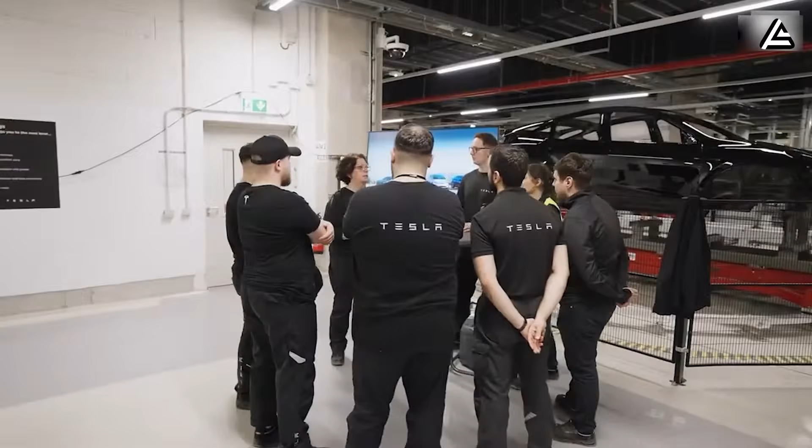How is Elon Musk using aluminum to declare war on China's battery monopoly?

There's one truth the mainstream media rarely dares to say out loud. China controls over 75% of global lithium-ion battery manufacturing and owns majority stakes in cobalt and graphite refinement. China also controls over 50% of cobalt refining capacity used in high-performance cathodes, over 80% of natural graphite anode processing, and almost all low-cost lithium hydroxide conversion plants used for EV batteries.

In 2024 alone, Tesla had to reroute over $3.8 billion worth of battery materials due to export restrictions from Beijing. The geopolitical implications run deeper than most realize.

China's dominance isn't accidental. It's the result of decades of strategic investments in mining infrastructure, refining capabilities, and manufacturing scale. By controlling the upstream supply chain, China effectively controls the pace and pricing of global EV adoption. This creates a strategic vulnerability for Western automakers, who find themselves dependent on a single nation for their most critical component.

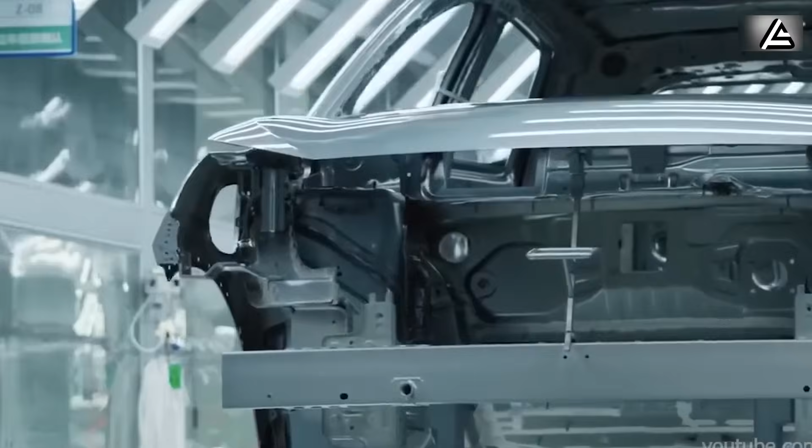Consider the recent escalation. In 2024, China implemented new export controls on graphite, a critical anode material. This single policy decision sent shockwaves through the global EV industry, forcing companies like Tesla to scramble for alternative suppliers and accept higher costs. The message was clear.

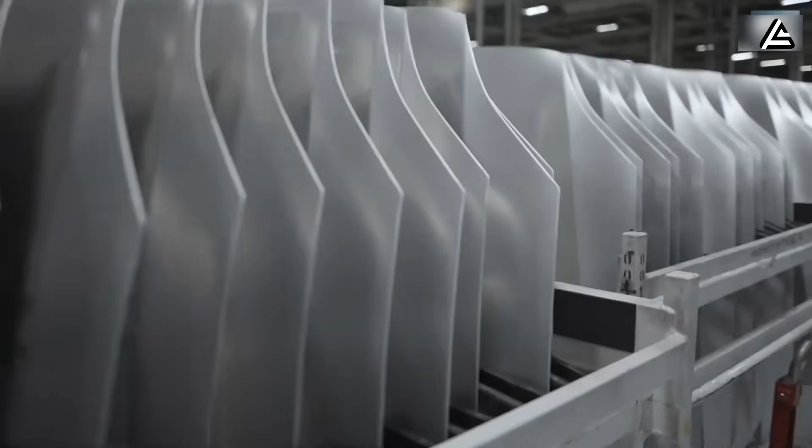China's battery material dominance gives it significant leverage over the global transition to electric transportation. That means if you're building an EV even in America or Europe, your battery is still built in China by Chinese-controlled supply chains. And that includes Tesla, until now.

But aluminum changes everything. Aluminum is refined locally in the United States, Canada, and Australia with zero geopolitical friction. It's already part of Tesla's internal supply chain via Giga Texas smelting units, newly expanded in Q3 2025. Unlike lithium or cobalt, there's no child labor, no rare earth blackmail. Tesla has been preparing for this moment longer than anyone realizes.

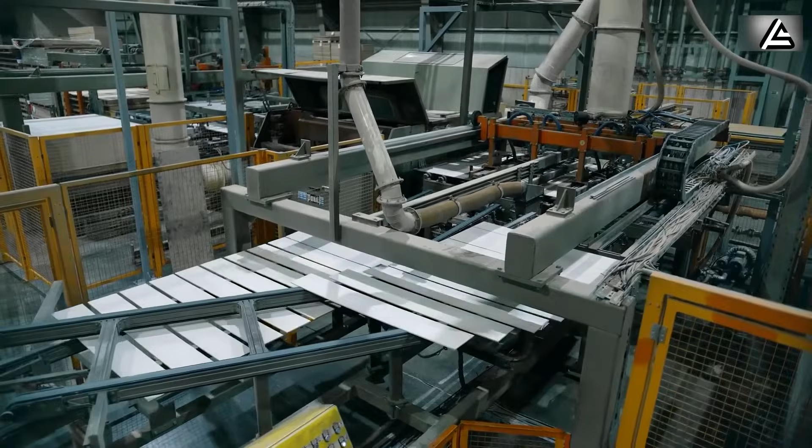The aluminum advantage extends beyond just supply security. Aluminum is the most abundant metal in Earth's crust, making up about 8% of all rock and soil. Compare this to lithium, which represents just 0.002% of the Earth's crust and is concentrated in a handful of geographic locations.

This abundance means price stability. Aluminum prices have remained relatively stable over decades, while lithium prices have experienced extreme volatility, sometimes increasing by 500% in a single year. In fact, Tesla and Alcoa Rio Tinto are collaborating to develop a carbon-neutral ELYSIS aluminum smelter, with industrial trials starting in 2024.

An aluminum smelter was delivered to Giga Texas in February 2021, demonstrating Tesla's expanding in-situ aluminum casting capabilities. They've expanded in-house smelting capacity at Giga Texas to support structural aluminum casting and patented new battery-grade aluminum oxide treatments in late 2024, now embedded in the aluminum-ion cell architecture.

This isn't a coincidence. This is war preparation. Tesla's vertical integration strategy with aluminum represents a masterclass in industrial planning. By bringing aluminum smelting in-house, Tesla gains control over not just the raw material supply, but also the quality and specifications of the aluminum used in their batteries.

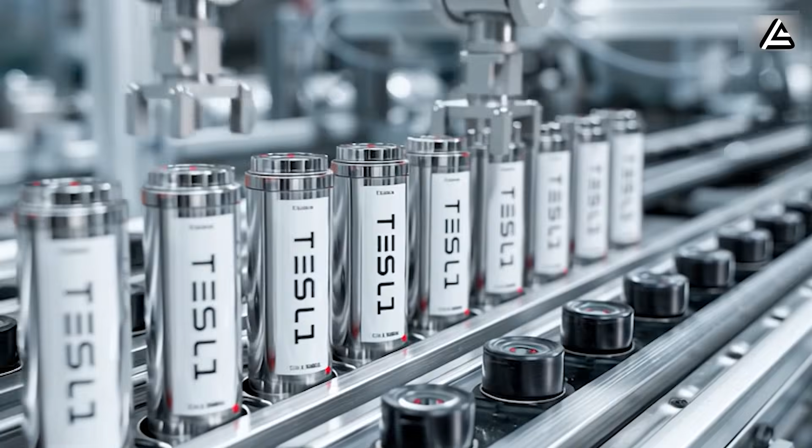Elon Musk's aluminum-ion battery is not just chemistry, it's a geopolitical missile. It's how Tesla breaks free from China and takes 100% control of its EV production chain.

By going aluminum-ion, Tesla doesn't just save on cost or weight. They gain something much more powerful: sovereignty, no delays from foreign ports, no risk of sanctions, export bans, or price extortion, and total vertical integration, from raw metal to battery to vehicle, entirely on United States soil.

This is why Tesla isn't loudly marketing the aluminum-ion battery yet. Because it's not just a product launch. It's a strategic decoupling from the most powerful manufacturing monopoly in the EV world.

And Elon Musk knows: whoever controls the battery supply controls the future of transportation. If Tesla really manages to control the entire EV supply chain on American soil, from the raw metal to the motor, is that an industry shocker?

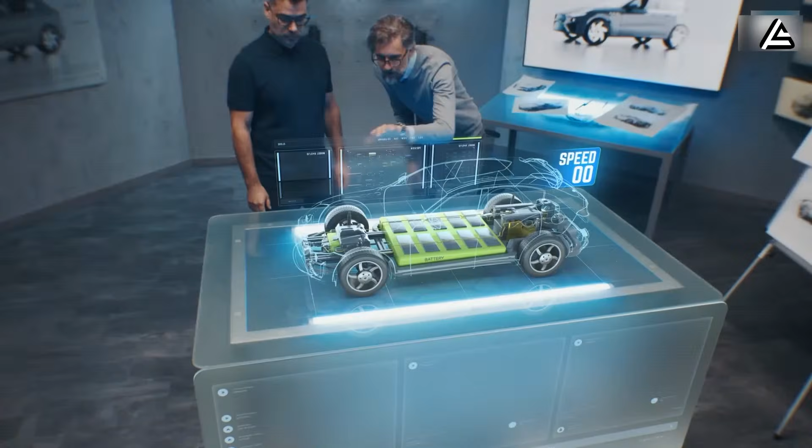Why is this battery the first to finally fix EV's hidden weakness: slow power delivery? Let's face the truth that nobody in the EV industry wants to say out loud. Charging fast doesn't mean your car drives strong.

Sure, it sounds great to say your EV can go from 0 to 100% in 20 minutes. But then why does your car still hesitate when merging onto the highway? Why does acceleration flatten out when you're carrying 5 passengers uphill? Because the real limitation is not the recharge rate, it's discharge performance.

Lithium-ion batteries have been failing us quietly for years. The physics behind this limitation are more complex than most realize. Traditional lithium-ion cells face a fundamental trade-off between energy density and power density. You can optimize for one, but not both simultaneously.

This occurs because lithium ions move relatively slowly through the electrolyte, creating bottlenecks during high-demand situations. When you floor an EV, the battery management system actually limits power output to prevent overheating and voltage sag, which is why even high-performance EVs can feel sluggish compared to their theoretical capabilities.

Consider the real-world implications. A Tesla Model S Plaid can theoretically produce over 1,000 horsepower, but only for brief bursts before thermal and voltage limitations kick in. During sustained acceleration, like highway merging with a full load, the actual power delivery drops significantly.

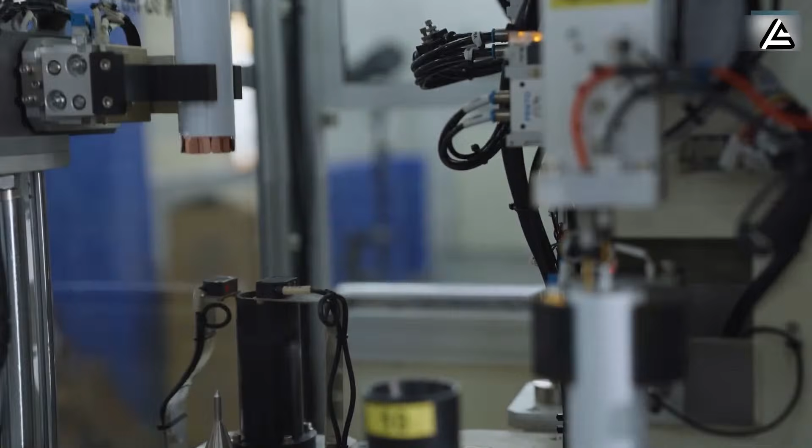Tesla's aluminum-ion shock changes everything. The 2026 Tesla aluminum-ion cell isn't just about being lighter or cheaper. It's built to deliver raw, sustained power without hesitation. While every other manufacturer focuses on cramming more energy into their cells, Tesla engineered theirs to unleash that energy like a controlled explosion. Now imagine what happens when Tesla flips that equation.

The 2026 aluminum-ion battery uses a tri-channel aluminum flow matrix for uniform current extraction, carbon-integrated anode mesh designed for up to 1,000 amperes of instantaneous discharge, and Tesla's new firmware-controlled power surge modulation, which delivers adaptive burst output when the driver demands full power. These are the actual engineering breakthroughs that make this battery a discharge monster.

The tri-channel aluminum flow matrix deserves special attention because it represents a completely different approach to ion transport. Unlike lithium-ion cells, where ions move through a single electrolyte medium, Tesla's design creates multiple parallel pathways for aluminum ions to move simultaneously. This is similar to how multi-lane highways handle traffic more efficiently than single-lane roads. The result is dramatically reduced internal resistance and the ability to maintain high current flow without the voltage drops that plague lithium-ion systems.

The numbers are absolutely devastating. 15C continuous discharge rating, that's up to 375 watts per cell, 13 times higher than some lithium cells in compact EVs. Peak pulse discharge of 60C, or 1,500 amperes per hour at the pack level for 5 seconds without degradation. Less than 4% voltage sag at 90% load. It maintains greater than 94% power delivery after 10 consecutive acceleration cycles at 70 miles per hour.

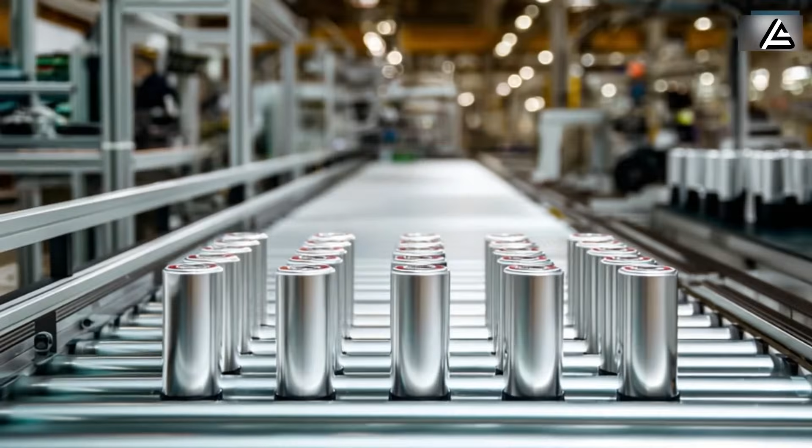Here's the shocking tested data that proves this isn't hype. In Tesla's internal testing, a Model 2 prototype equipped with this battery reached 0 to 60 miles per hour in 3.8 seconds, with only a single rear motor. It maintained 98% torque output during a 12-minute uphill climb with full passenger and cargo load.

And for towing, peak discharge remained stable at 1,200 amperes when pulling a 2,000-pound trailer at 65 miles per hour on a 5% incline. Battery temperature increased by only 11.2 degrees Celsius during the entire climb. Let that sink in. Full throttle, full load, full heat, and it just keeps going.

So if you've ever floored your EV and thought, why does this still feel slower than a gas truck? Elon Musk just built your answer, and it's firing back at every weak battery ever made.

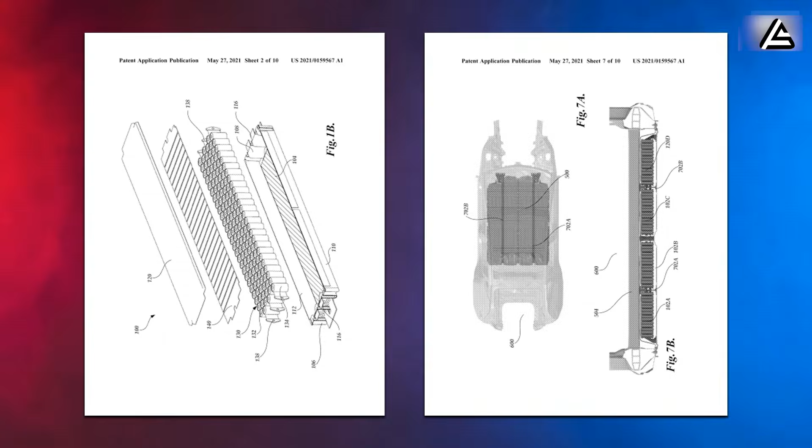How is Tesla turning its gigapress into a giga battery plant? This is where things get wild. In 2021, Tesla quietly filed a patent titled Integrated Energy Storage System, and most people missed what it truly meant. On the surface, it described a battery pack with a honeycomb-structured bottom and a built-in heat dissipation system. But what it really outlined was something far more radical: a battery that isn't installed into the car, because it is the car.

The patent details reveal Tesla's vision for what they call structural battery integration. But this goes far beyond current structural battery packs. Traditional structural batteries still maintain a distinct separation between the battery cells and the vehicle structure. Tesla's approach fundamentally merges these systems at the molecular level. The aluminum used in the battery chemistry is the same aluminum used in the structural components, creating a unified system where the distinction between battery and chassis becomes meaningless.

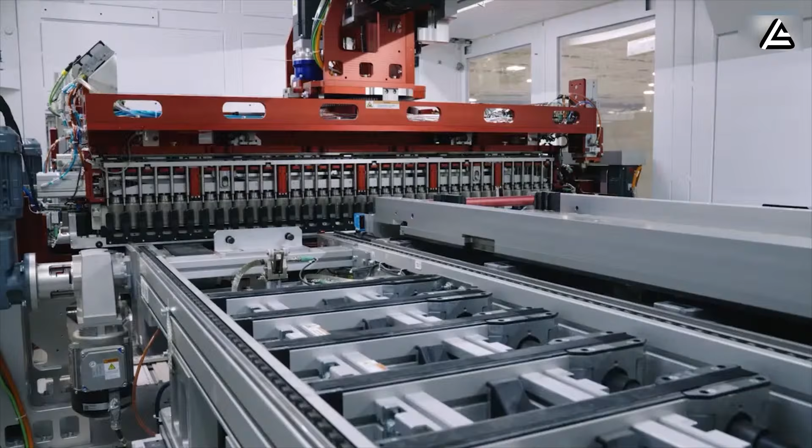Here's how Elon Musk is pulling it off. Instead of building a battery as a separate unit and bolting it to the chassis, Tesla is now using high-pressure aluminum casting, the same massive gigapress tech used to mold the rear frame of the Model Y, to cast the battery structure directly into the car's body. We're talking about structural battery enclosures, thermal channels, even electrical conduits, all molded into one unified piece of the frame. No more battery modules, no more miles of wires, no bolts, no brackets, no glue. Just molten aluminum forming a vehicle that is both a machine and an energy source.

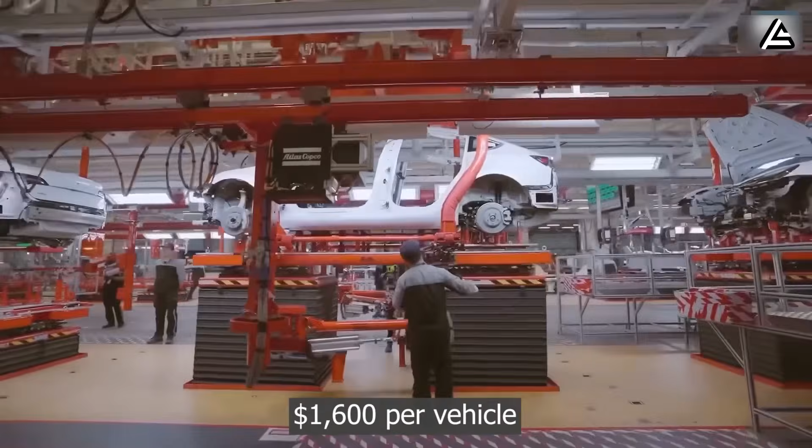The battery is the car. And the impact on manufacturing? Staggering. By removing over 400 individual parts, Tesla has slashed battery assembly time by more than 72%, cutting production costs by $1,600 per vehicle, not just in materials but in labor, robotics, and floor space. That's not just a technical upgrade. It's a full-blown rewrite of how electric vehicles are built. This isn't hype, it's real, it's patented, and it's already happening inside Giga Texas. It's reshaping how the future is built, from the gigapress up.

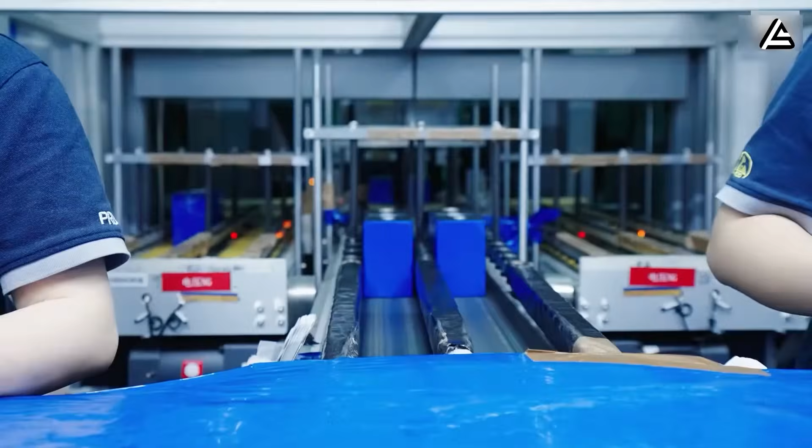The manufacturing implications extend beyond just Tesla's production lines. This approach effectively makes Tesla's vehicles impossible to reverse engineer or replicate using traditional automotive manufacturing methods. Competitors would need to develop their own aluminum-ion chemistry, build their own smelting capabilities, and create their own high-pressure casting systems. The barriers to entry aren't just technological, they're infrastructural, requiring investments in the billions of dollars and years of development time that most automakers cannot afford.

There are a few more elements that we won't get to today, but we will get to in the future. Elon Musk didn't drop that line for fun. It was a message to those paying attention that Tesla's next leap won't come from lithium, or even solid state. That element is aluminum, and in 2026, it's poised to power the Tesla Model 2 with a battery so radically cheap and efficient that even Musk's competitors are calling it impossible. But what's new is here: the Omega Core battery that can take you over 100 days without charging.

How is Omega Core smashing every scientific limit? The Omega Core has achieved what every physicist said was scientifically impossible by delivering an absolutely staggering 1,120 watt-hours per kilogram. That's over 4 times the energy density of Tesla's current 4680 cells, at 272 watt-hours per kilogram. To put this in perspective, this single breakthrough means the 2026 Tesla Model 2 will pack the same energy as a Model S, while weighing less than a compact car.

But here's where it gets even more insane. This battery maintains over 11,000 full charge-discharge cycles before reaching 90% capacity, meaning it will outlast the actual vehicle itself by decades. The cycle life achievement defies conventional battery physics because it addresses the fundamental problem that has limited all previous chemistries: structural degradation during charge cycles. Traditional lithium-ion batteries experience crystal lattice expansion and contraction that gradually break molecular bonds. The Omega Core's vacuum graphene lattice eliminates this expansion because energy is stored as quantum states rather than chemical bonds. Each charge cycle simply adjusts electron quantum states without physical material stress.

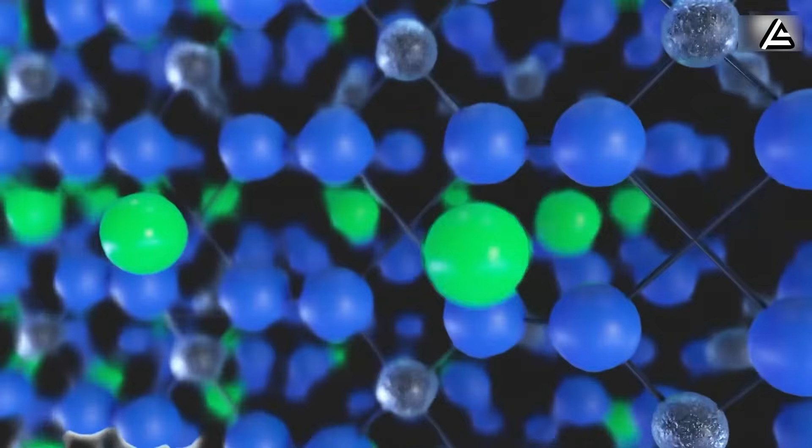The extreme temperature tolerance stems from the plasma conduction layer's unique properties. At ultra-low temperatures, conventional batteries fail because ionic movement slows to near zero. Plasma conduction maintains electron flow because the ionized particles respond to electromagnetic fields rather than thermal energy. At high temperatures, the vacuum graphene lattice prevents thermal runaway because there are no chemical reactions to accelerate, and energy storage occurs through quantum mechanical effects that remain stable regardless of temperature.

What's absolutely mind-blowing is that despite this incredible performance, the Omega Core achieves a 48% weight reduction compared to the LFP pack in the current Model 3. Tesla has essentially created a battery that's simultaneously more powerful, longer-lasting, temperature-resistant, and dramatically lighter than anything that exists today.

This is possible because of quantum interlocked conduction. Energy moves through quantum-entangled electron layers instead of conventional current, creating a completely new category of energy transfer that operates beyond classical physics. Quantum interlocked conduction represents Tesla's most audacious technical leap.

Traditional batteries store energy by physically moving atoms and molecules. The Omega Core stores energy by manipulating quantum spin states of electrons within the graphene lattice. These quantum states require no physical mass beyond the graphene substrate, explaining the dramatic weight reduction. The electrons exist in superposition states that can store multiple energy levels simultaneously, essentially achieving energy storage densities that approach theoretical maximum limits.

The result of this quantum breakthrough? Zero thermal runaway risk, zero swelling, and zero fire hazard — the three deadly problems that have plagued every battery technology for decades — have been completely eliminated. Tesla hasn't just improved batteries. They've created an entirely new form of energy storage that makes everything else obsolete, and you absolutely must see the full technical breakdown of how this will change everything we know about electric vehicles forever.

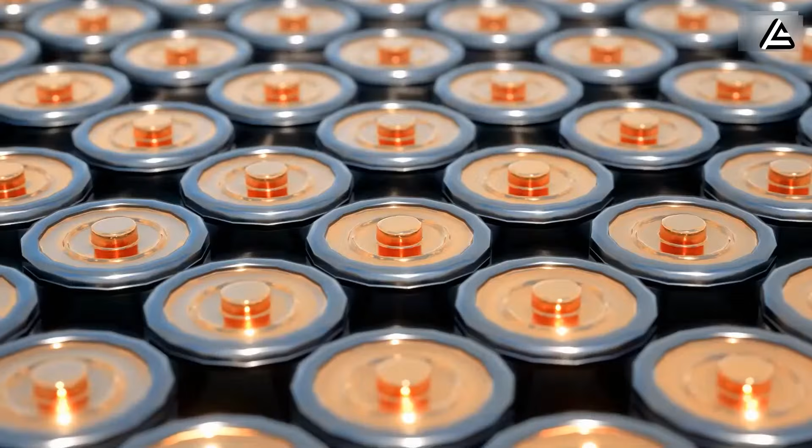Why can this battery power a Tesla for 100 days with no charging? The battery doesn't just store power, it harvests it. And what Tesla just demonstrated will make you question everything you thought you knew about energy.

The Omega Core features an integrated ambient ion harvesting system that fundamentally changes how we think about battery technology. This revolutionary system draws low-frequency radio and electromagnetic energy from the surrounding environment, similar to how radio telescopes gather ambient signals from space. But instead of listening to the cosmos, it's constantly feeding your Tesla. Even more incredible is Tesla's new kinetic flux coil that absorbs energy during motion, storing power as you drive, and even while parked, meaning your car is literally recharging itself every single moment.

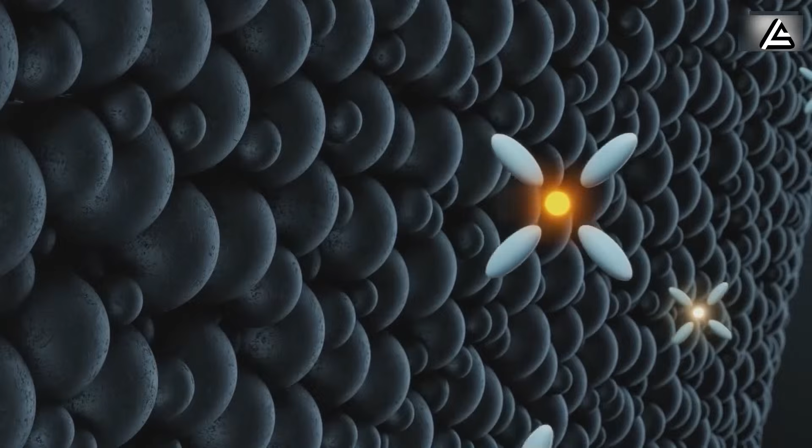The ambient ion harvesting system operates across multiple electromagnetic frequency bands simultaneously. Very low-frequency radio waves from global navigation systems contribute 0.3 to 0.8 kilowatt-hour daily, while ambient Wi-Fi and cellular signals add another 1.2 to 2.1 kilowatt-hour. The system includes thousands of microscopic antennas integrated directly into the vehicle's body panels, each tuned to specific frequency ranges. Unlike solar panels that require direct sunlight, electromagnetic harvesting works 24 hours a day, 7 days a week, even underground or inside buildings.

The kinetic flux coil represents an advanced application of Faraday's law of electromagnetic induction. As the vehicle moves through Earth's magnetic field, specially designed coils within the wheels and chassis generate an electrical current. But Tesla's breakthrough involves using the car's entire metal structure as a massive induction coil. Even parked vehicles experience energy generation from Earth's magnetic field fluctuations, wind-induced vibrations, and thermal expansion cycles that create microscopic movements sufficient for energy harvesting.

Tesla's secret test vehicle has already proven this isn't science fiction. It drove an absolutely staggering 8,900 miles with zero plug-in charging. The ambient harvesting system consistently delivered daily recharge rates between 5 to 12 kilowatt-hours, depending on location, with urban environments providing higher electromagnetic energy due to cell towers, Wi-Fi networks, and radio frequencies constantly surrounding us.

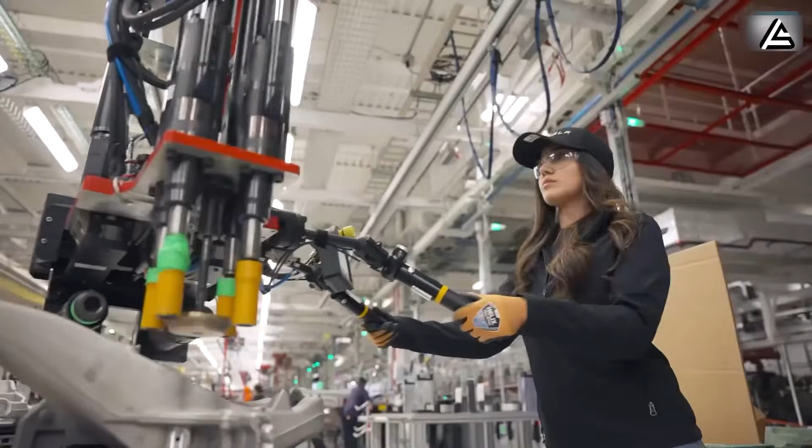This is the most revolutionary breakthrough in transportation history. When you see the full technical breakdown of how Tesla's ambient harvesting system works, you'll understand why every other automaker is desperately trying to catch up with technology that's already years ahead of anything they imagined possible.

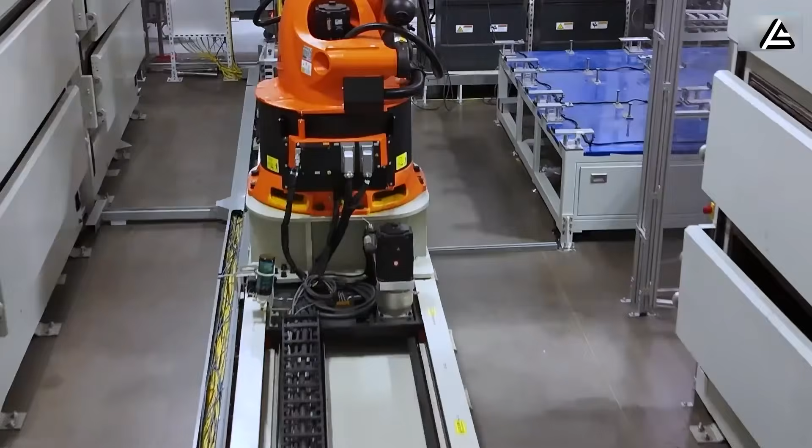How is Elon Musk quietly introducing a new class of energy systems? While the world obsesses over traditional lithium-ion and solid-state batteries, Tesla has been secretly developing what they're calling the Omega Core battery, a fifth-generation plasma-assisted semi-solid-state battery that's being developed exclusively by Tesla in collaboration with SpaceX and MIT's Applied Materials Lab. To explain the name, this type of battery uses an Omega Core structure.

Specifically, instead of just a normal electrode block, the core is designed in a continuous loop shape like the letter omega, which helps increase the active surface area, reduce internal impedance, and optimize heat conduction.

The Omega Core's geometric advantage becomes clearer when we examine the mathematics. Traditional rectangular electrode configurations have limited surface area contact with electrolytes, creating bottlenecks in ion flow. The continuous loop design increases surface area by approximately 340%, while simultaneously creating multiple conduction pathways that eliminate single-point failure modes.

This architectural approach borrows directly from SpaceX's Raptor engine cooling channels, where heat distribution across curved surfaces prevents thermal stress concentration. From a materials science perspective, the collaboration with MIT's Applied Materials Lab has yielded breakthrough insights into electron behavior at the nanoscale.

Their research indicates that curved electrode geometries create quantum tunneling effects that weren't possible with traditional flat-plate designs. This tunneling reduces activation energy barriers, allowing electrons to move more freely, even at lower temperatures, explaining the system's exceptional cold weather performance.

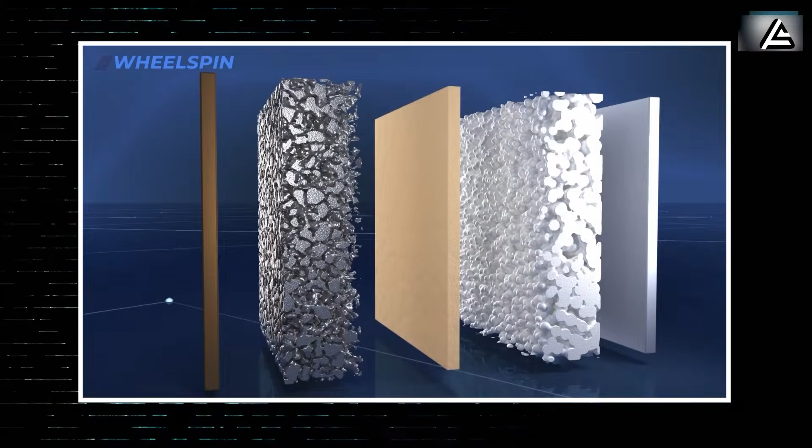Inside, the semi-solid-state architecture is where things get absolutely mind-blowing. Unlike conventional solid-state batteries that use brittle ceramic electrolytes that crack under pressure, the Omega Core uses a revolutionary flexible quasi-glass electrolyte that maintains stability under extreme stress.

This breakthrough enables Tesla to achieve the incredible energy density of solid-state technology without the catastrophic brittleness or astronomical costs that have plagued every other manufacturer's attempts. That means a battery that is both lighter and far more durable, able to operate from -80 degrees Celsius up to 250 degrees Celsius without degradation.

But here's where it gets insane. The plasma-driven electron mobility system completely abandons traditional copper current collectors and instead uses a plasma conduction layer that allows electrons to move with near-zero resistance. This means dramatically improved energy flow and virtually eliminated heat loss, creating efficiency levels that seemed impossible just months ago.

The plasma conduction layer represents a fundamental departure from metallic conduction. Traditional copper current collectors lose approximately 3 to 7% of energy to resistance heating, but plasma conduction operates through ionized gas particles that can achieve near superconductor performance at room temperature.

The plasma is contained within microscopic channels, just 50 nanometers wide, thinner than viral particles, and maintained through magnetic field stabilization derived from Tesla's expertise in electric motor magnetic field control.

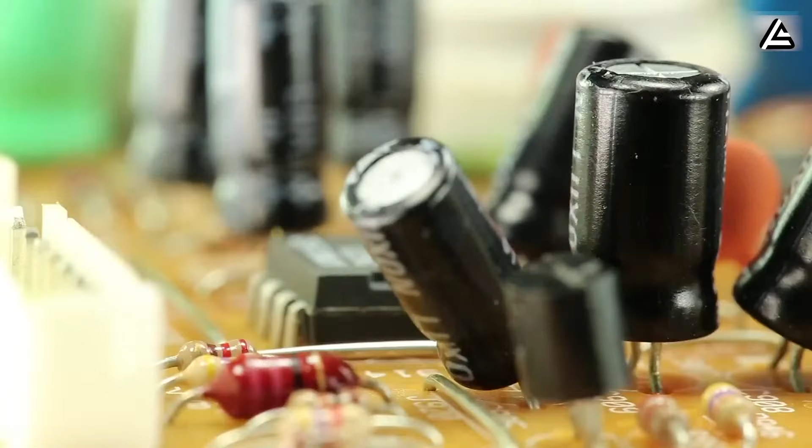And the real game changer is the vacuum graphene lattice that stores energy in a multi-layered vacuum chamber between graphene oxide plates. This functions almost like a capacitor and battery hybrid, delivering ultra-fast energy release for explosive acceleration while maintaining long-term energy retention, like a traditional battery. In plain terms, Tesla has created a semi-solid-state lithium-free battery using plasma conduction and vacuum graphene storage layers, essentially a plasma graphene semi-solid battery that represents an entirely new fifth-generation category sitting beyond anything solid-state technology can achieve.

The vacuum graphene lattice operates on principles similar to those used in high-energy particle accelerators. By maintaining near-perfect vacuum conditions between graphene layers, electrons can move without atmospheric interference, achieving velocities approaching 10% of light speed within the material. This explains the instantaneous power delivery characteristics, because electrons don't gradually flow like in conventional batteries. They discharge in coordinated waves that can deliver maximum current within milliseconds of demand.

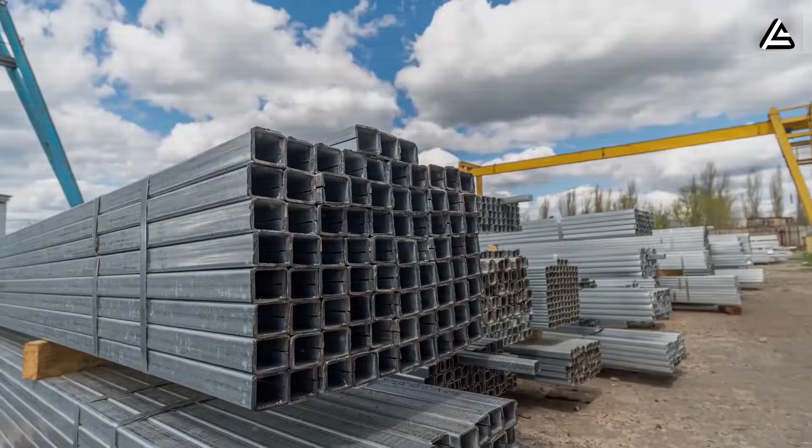They are designing a battery pack that doesn't have the flammable liquid electrolyte like in lithium ones. Nothing to burn, nothing to ignite. The core material here is pure aluminum, and it brings a natural advantage that graphite, silicon, or carbonate in lithium batteries never had: superior heat resistance. Lithium starts running into risk once temperatures pass about 120 degrees Celsius, but aluminum keeps working perfectly in the 200 to 250 degrees Celsius range. That's basically double the thermal safety window.

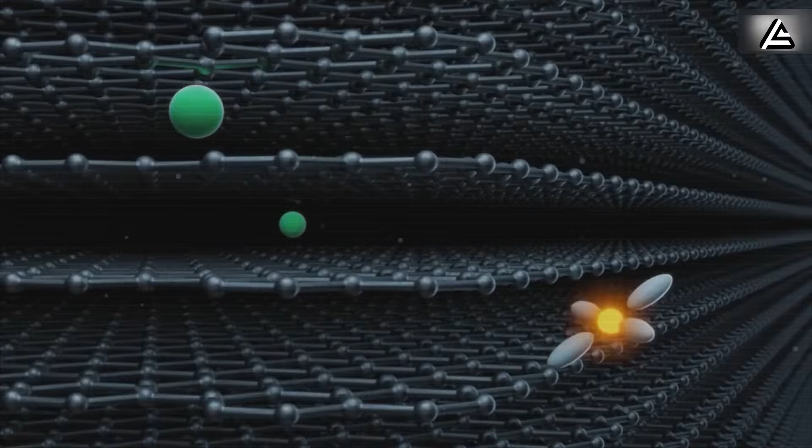But there's a massive change no one is talking about yet: the aluminum cathode superstructure Tesla is testing from Q3 this year. Why does it matter? Instead of a flat, closed cathode like in traditional lithium batteries, the solid aluminum cathode is designed as a honeycomb lattice of thousands of nano-microhexagons. This 3D honeycomb increases the cathode surface area 5 times and spreads heat about 40 times faster than lithium. Aluminum stands up strongly to heat and now even cools itself. High temps are no longer a threat.

This technology then will reach absolute safety with a nanoceramic coating only 0.5 micrometers thin, only about 1/100th the thickness of a human hair. This coating smooths the cathode surface, letting aluminum ions flow evenly. That means no more traffic jams of energy that turn into hidden hotspots and eventually explosions. This structure wipes out the battery industry's worst nightmare: dendrites, those tiny metal spikes that grow inside lithium cells, puncture separators, then trigger shorts and fires. With aluminum, they simply don't appear.

No complex cooling systems, no heavy protective shells. The battery itself is the safety system. Tesla is cutting out the danger at its root to protect their customers. The ultimate benefit is peace of mind when we're driving an EV. The fire risk is 99.3% eliminated, even if the pack overheats or takes a heavy hit. That's especially huge for drivers in America's hottest regions: Arizona deserts, Death Valley, or summer roads in Florida and Texas. Long trips get easier when you never have to worry about hidden shorts inside the pack.

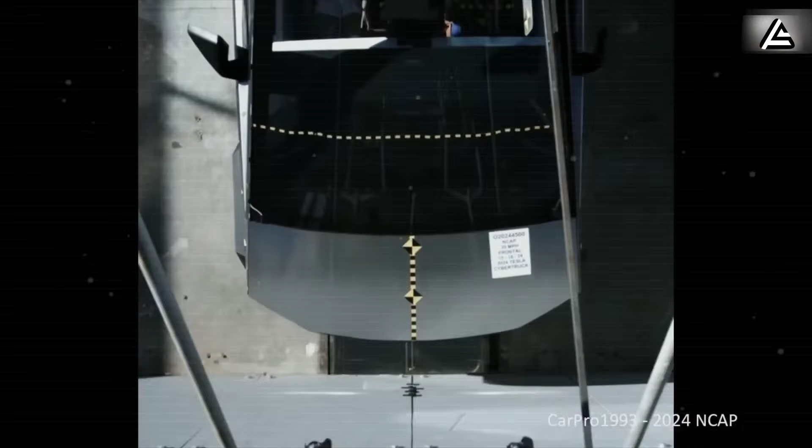In Tesla's internal crash tests, the fire risk of aluminum-ion batteries drops to just 0.05%, meaning only 1 in 2,000 packs caught fire under extreme collision conditions. They're roughly 50 times safer than typical lithium-ion batteries, which have a fire risk of about 2.5% in similar crashes.

With a lithium battery, friction and impact forces can spike cell temps to 90 to 100 degrees Celsius. Once separators rupture, flammable electrolyte leaks out, metal sparks fly, and the worst-case scenario begins. With aluminum, cells rise only to about 70 to 80 degrees Celsius, in the safe zone. And even if they break open, there's no liquid fuel to catch fire, no chain reaction spreading flames. In the same situation where dendrites inside lithium would trigger shorts and explosions, aluminum cells simply stay put, warm a little, and keep everything under control.

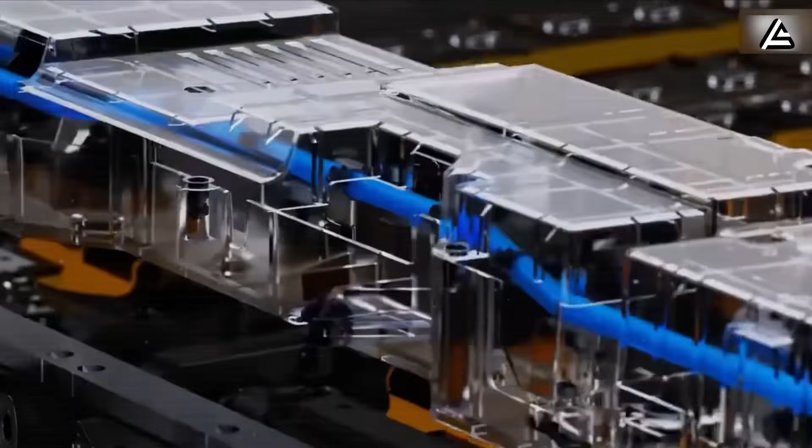How Tesla turns fire into a non-event at the pack level with aluminum-ion battery. Once the danger of combustion inside each individual battery cell has been eliminated at the chemical level, the next and decisive factor for real-world safety is making certain that a single failure cannot escalate into a full vehicle fire. This is where Tesla's aluminum-ion design stands apart. It is not only safer in principle, it is engineered to fail safely in every plausible scenario, which is what actually protects families on the road.

To begin, every micro-module inside the pack is wrapped in a thin aerospace-grade barrier that blocks heat transfer and channels any vented gas into a dedicated dual-channel exhaust spine. If a cell vents, microfuses open automatically in approximately 4 to 6 milliseconds, cutting current in that lane before heat can spread to neighboring regions.

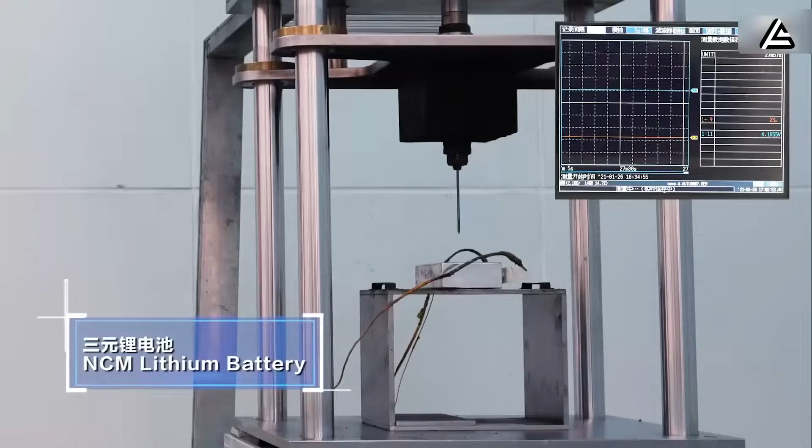In abuse tests that mirror the SAE J2464 nail penetration procedure, the local peak temperature reached only about 82 to 88 degrees Celsius and fell below 60 degrees Celsius in under 90 seconds, with no ignition in adjacent cells. Rapid electrical isolation and directed gas flow stop a thermal chain reaction at the instant it would otherwise begin.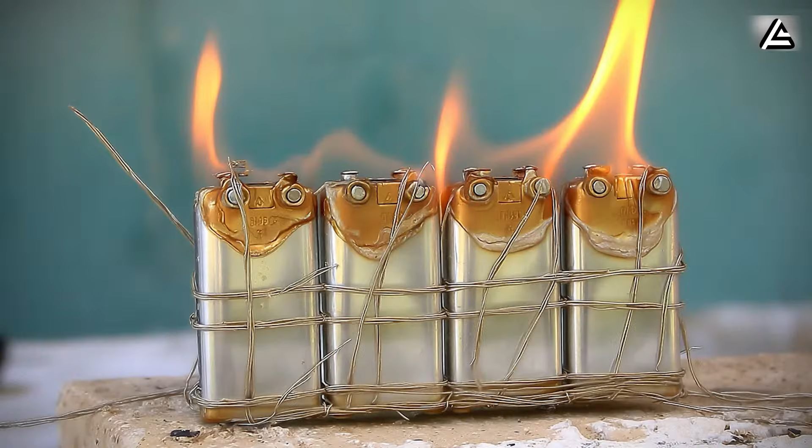The next layer of protection suppresses thermal propagation at the pack level. In trials, Tesla intentionally creates the worst case by overcharging a cell to failure inside a heated module where ambient temperature is 65 to 70 degrees Celsius. Because the aluminum honeycomb cathode and the nano-ceramic surface shed and spread heat so effectively, no neighboring module exceeds 45 degrees Celsius, and the propagation index remains at 0 of 6 compromised modules.

Lithium-ion packs often depend on bulk liquid cooling and heavy armor to chase a similar outcome, whereas the aluminum pack functions as its own firewall. Three-dimensional thermal pathways and a non-flammable electrolyte ensure that heat dies where it starts.

A further improvement is controlled venting. Since aluminum-ion cells do not use carbonate solvents, there is no pressurized fuel mixture waiting to ignite. Tesla's side vent manifolds cap the peak gas flow from a single event at less than 8 liters per second and dilute it in a subfloor plenum that exhausts downward.

In cabin safety simulations, peak concentrations of carbon monoxide and volatile organic compounds stayed below 20% of the profiles observed in lithium-ion incident models, while smoke density remained under 0.2 inverse meters. Visibility stays usable for evacuation, passengers gain precious time to exit, and the interior does not become unbreathable.

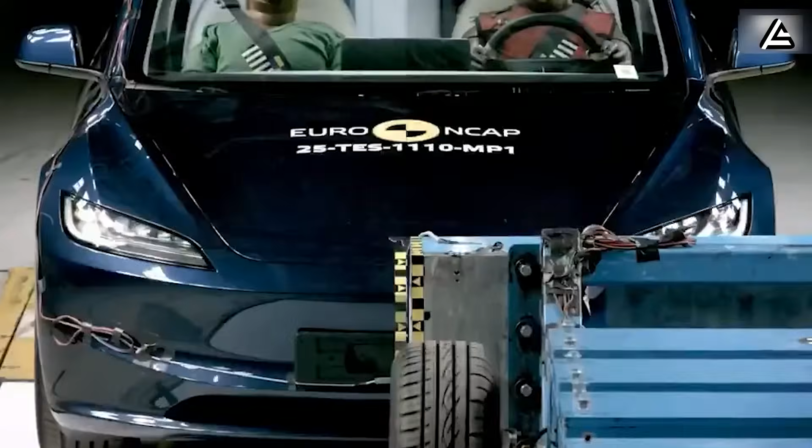Tesla's crash logic also reacts faster than the human eye can register. An active isolation switch on the high-voltage loop drops pack potential below 60 volts in roughly 8 to 10 milliseconds, when sensors detect airbag-level deceleration or an underbody intrusion. Combined with arc-proof bus bars and gel-filled feed-throughs, this virtually eliminates post-impact arcing.

In internal sled tests, the likelihood of a post-crash fire is about 0.03 to 0.06%, roughly 40 to 80 times safer than legacy lithium-ion packs tested under similar pulses. Instant depowering and arc suppression remove the ignition source, which removes the flame front.

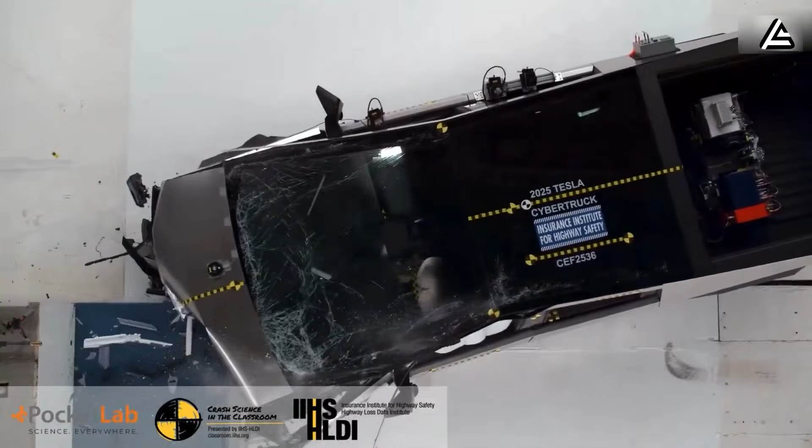Finally, the design accounts for everyday road abuse such as debris strikes, tow hook mistakes, and curb impacts. The tough skin tray spreads a puncture load across a larger area and cuts local strain by about 55 to 60% compared with flat trays.

In underbody spear tests at 35 kilometers per hour, internal temperatures rose by less than 12 degrees Celsius, and the pack self-recovered to normal operation after the faulted region was isolated. In practice, this turns damage into maintenance rather than headlines, which is the standard that matters most for daily safety.

How does Elon Musk's battery last longer than any other battery on Earth?

Most lithium-ion batteries in current EVs, like in Tesla Model 3 and Model Y, are good for about 300,000 to 500,000 miles. That means they'll drop to roughly 80% capacity after that point. And then the process of going down from 80% to 50% capacity only happens somewhere around the next 100,000 miles of driving.

But Musk's aluminum battery rewrites everything we know about battery life—not just hundreds of thousands of miles anymore. Now it's 3 million. The battery pack can last a lifetime. Why does it last so long?

Aluminum-ion once again fixes the weaknesses of lithium electrolytes. In lithium-ion batteries, carbonate solvents evaporate and break down after each charge cycle. This process creates solid deposits on the electrodes, making lithium ions harder to move and gradually reducing battery capacity—the classic battery degradation. Aluminum-ion batteries, on the other hand, use gel polymer electrolytes, which have a very high boiling point of 300 degrees Celsius, do not evaporate at normal pressure, and do not form solid deposits, limiting capacity loss over time.

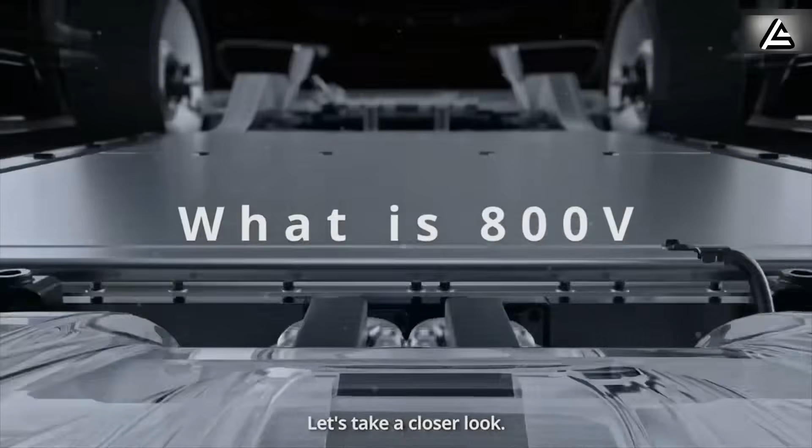There's also no need to worry about fast charging wearing out the battery. At high temperatures above 70 degrees Celsius, unlike lithium-ion which loses efficiency, aluminum ions move more easily, allowing very high currents to flow and enabling ultra-fast charging without overheating. That's why current lithium-ion batteries can only fast charge at 3 to 5 C, but aluminum-ion batteries can handle up to 100 C, reaching 80% charge in about 3 minutes and 100% in under 5.

That's roughly 7 times the lifespan of a Hyundai Ioniq 5 used daily for 30 years, and even over 11 times the lifespan of a Chevrolet Bolt's 17-year battery.

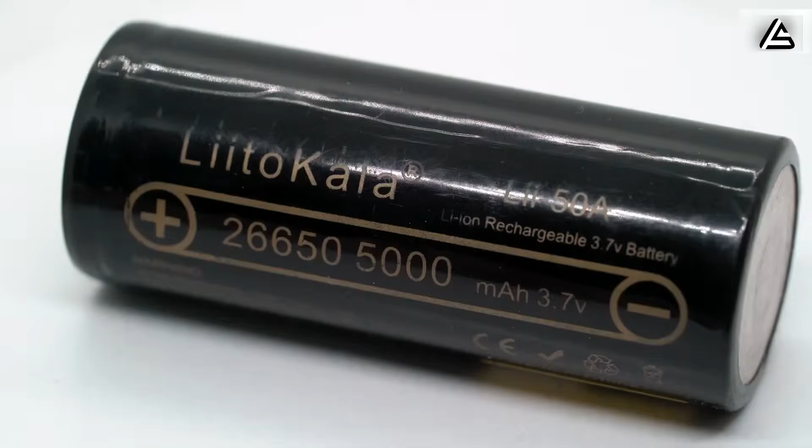Is this the real end of lithium? With the reasons for safety and longevity now clear, the larger picture comes into focus. The end of the lithium-ion era is no longer a theoretical claim. It follows from a sequence that starts with safety and then reshapes economics, infrastructure, and purchasing behavior.

Insurance responds first because it prices actual frequency and severity of losses. When aluminum-ion packs show roughly 50 times lower crash fire probability and non-flammable vent profiles, actuarial models cut comprehensive premiums by about 14 to 22% for vehicles that use these packs. That immediately influences fleet decisions, since fewer total loss fires and less smoke and soot remediation produce lower claims and lower premiums.

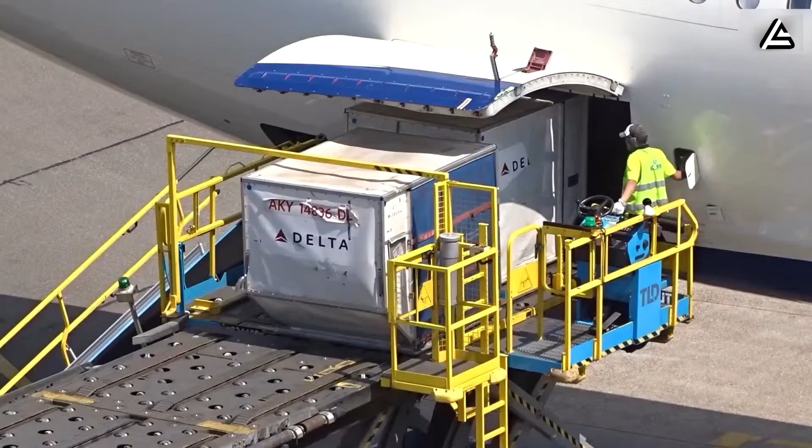Logistics is the next beneficiary. Lithium-ion packs ship under Class 9 dangerous goods rules for ocean and air, which raises cost and handling time. Once ignition vectors are removed, aluminum-ion modules are not treated as high risk. Routing becomes more flexible and ocean surcharges fall by approximately 120 to 180 US dollars per pack, while air surcharges decline by about 1.80 to 2.40 US dollars per kilogram on priority lanes. Lower shipping cost lets factories ramp faster and keeps less working capital trapped in transit.

Building codes then begin to support higher density charging and parking. Fire codes address worst-case flame spread. When that spread does not occur, underground parking, residential towers, and depot-scale fast charging face fewer spacing and compartment requirements. Early policy drafts in pilot jurisdictions already move in this direction for chemistries with essentially zero cell-level flammability. Developers can save roughly 6 to 11% of initial capital expenditure on electric vehicle-ready structures, which speeds urban adoption.

End-of-life processing tilts toward aluminum. Recyclers recover more than 97% of aluminum through established smelting and electrolysis. Lithium-ion black mass routes often yield 70 to 85% and carry toxic byproduct liabilities. Lower hazardous inventories reduce environmental closure bonds and shorten permitting, making aluminum-ion cheaper and faster to steward across the full life cycle.

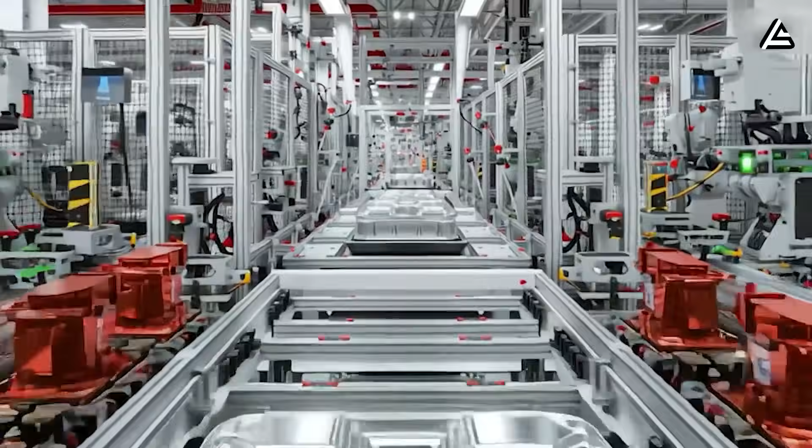Safety and durability also enable a new revenue stream, with round-trip efficiency near 94 to 96% and cycle life in the tens of thousands. Aluminum-ion packs can perform daily vehicle-to-grid and vehicle-to-home services without accelerated wear. In mature markets, this adds roughly 600 to 1,000 US dollars per year per vehicle via demand response and frequency regulation. Lithium-ion fleets often avoid daily cycling due to fire risk and rapid capacity fade, widening the total cost of ownership gap. As premiums drop, shipping eases, codes unlock dense deployments, recycling yields rise, and energy revenue appears.

Procurement shifts from chemistry preferences to spreadsheet outcomes. Internal scenarios point to lithium-ion share falling from more than 90% today to below 50% by 2030, with aluminum-ion and other non-flammable chemistries taking most new capacity. All of these forces originate in safety. Safety removes fires, and removing fires alters economics and regulation. When those change together, market share follows, and the lithium-ion era ends in practice rather than only in theory.

The shift away from lithium-ion is inevitable. By removing fire risk, extending lifespan far beyond today's norms, and rewriting the economics of electric vehicles, Tesla's aluminum-ion chemistry changes how we power transport.

One day you pull into a charging station with your EV at 5% battery. 10 minutes later, the time it takes to grab a coffee, you drive away with a full charge and 250 miles of range. Sounds impossible? Tesla's about to make it a reality. In the next year, Elon Musk is betting the company's future on something radically different: aluminum-ion batteries in the upcoming Model 2. Instead of asking, 'How far can you go?' they're asking, 'How fast can you refill?' And the answer might just obliterate every objection to EV ownership that still exists today.

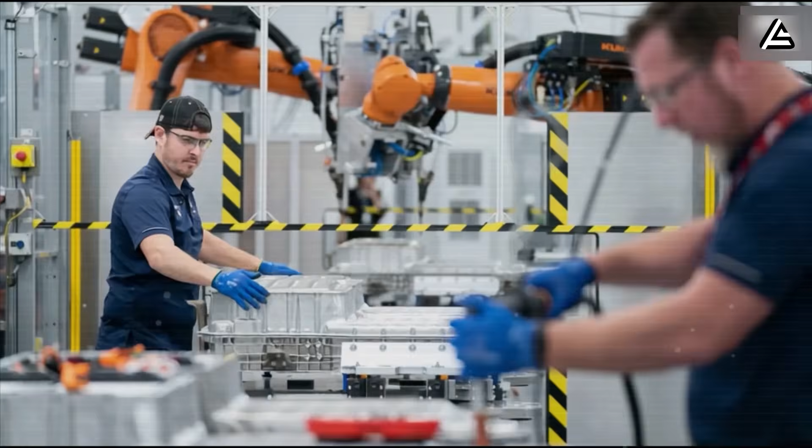Aluminum-ion aims to push that boundary far beyond what most drivers would ever need. Early projections suggest these cells could endure close to 10,000 full charge cycles, effectively quadrupling the life of a lithium pack. Put into real-world terms, a Tesla Model 2 rated at 250 miles per charge could theoretically cover more than 2.5 million miles before the battery chemistry breaks down.

This longevity creates a fundamental shift in vehicle economics that goes beyond the obvious. In today's market, battery degradation is the invisible depreciation curve that haunts every EV transaction. A 3-year-old Tesla might show 92% battery health, and that 8% loss directly impacts resale value. Buyers discount used EVs because they're essentially buying a car with a ticking clock on its most expensive component. Aluminum-ion could eliminate this concern entirely.

If a battery is rated for 10,000 cycles, and the average driver completes 50 cycles per year, that's 200 years of theoretical use. Even aggressive drivers doing 100 cycles annually would take 100 years to reach the limit. For practical purposes, the battery becomes immortal within the vehicle's usable lifespan.

The ripple effects extend throughout the automotive ecosystem. Fleet operators, including taxi services, rideshare drivers, and delivery companies, currently face battery replacement as a major operational cost. A rideshare vehicle might accumulate 200 miles per day, or roughly 73,000 miles annually. With lithium-ion, that's about 7 years before significant degradation. With aluminum-ion, the same vehicle could operate for more than 30 years on the original battery. This transforms the total cost of ownership calculation.

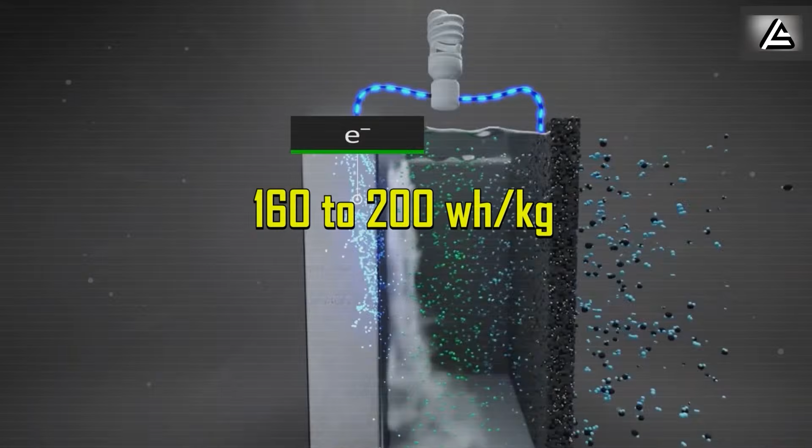Why does energy density matter less than you think? Energy density is the first number most engineers and buyers look at, and here aluminum-ion faces an uphill battle. Current estimates put these cells at 160 to 200 watt-hours per kilogram, while modern lithium-ion NCM packs used in Tesla's Model 3 or Hyundai's Ioniq 5 deliver closer to 250 to 270 watt-hours per kilogram. On a practical scale, that gap means a 50 kilowatt-hour aluminum-ion pack would store roughly 8 to 10 kilowatt-hours less energy than an equivalent lithium pack, translating to about 30 to 40 fewer miles of driving range.

But here's where conventional wisdom breaks down. Energy density has been the dominant metric because lithium-ion charging speeds forced it to be. When you're stuck at a charger for 30 to 45 minutes, every mile of range becomes precious. You need to maximize distance per charge because each charging session is a significant time investment. Aluminum ion fundamentally changes this calculation.

Consider the parallel with smartphones. Early iPhones prioritized battery capacity because charging was slow and inconvenient. As fast charging improved, manufacturers started reducing battery sizes because users could top up quickly throughout the day. The same psychology applies to EVs. If charging takes 10 minutes instead of 30, that 30-mile range deficit becomes nearly irrelevant for most driving patterns. According to U.S. Department of Transportation data, 95% of car trips are under 30 miles. For the vast majority of daily use cases, you're never approaching the battery's limit.

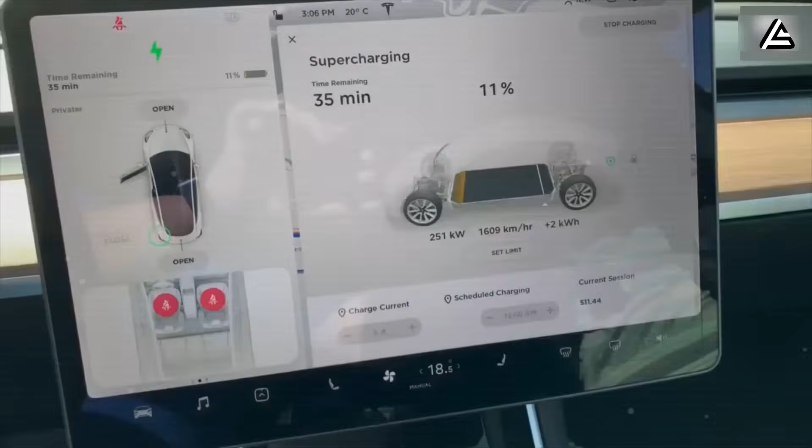But the story doesn't end with raw capacity. The advantage of aluminum ion is not how far you can drive per charge. It's how quickly you can refill. Lab results and early prototypes suggest a 0 to 100% recharge in just 10 minutes. Compare that with Tesla's current Supercharger V3, which still takes around 30 minutes to move a lithium-ion pack from 10 to 80%. The gap is even more striking when you look at controlled testing. Researchers at the University of Queensland reported that aluminum-ion cells could cycle up to 60 times faster than lithium-ion, meaning their charge acceptance is on a completely different level.

Let's model a real-world scenario. You're driving from Los Angeles to San Francisco, approximately 380 miles. With a Model 3 long range, you'd need one charging stop of about 25 minutes to reach 80%. With a Model 2 having an aluminum-ion battery, you'd need 2 stops, but at 10 minutes each for a full charge. The total charging time of Model 3 is 25 minutes, and Model 2 is 20 minutes. Despite having lower energy density, you actually save time on the journey.

The infrastructure implications are equally significant. Faster charging means higher turnover at charging stations, effectively multiplying capacity without building new stalls. If a Supercharger location has 8 stalls and each session takes 30 minutes, that's 16 cars per hour. With 10-minute charging, the same infrastructure serves 48 cars per hour, which is a triple improvement in throughput.

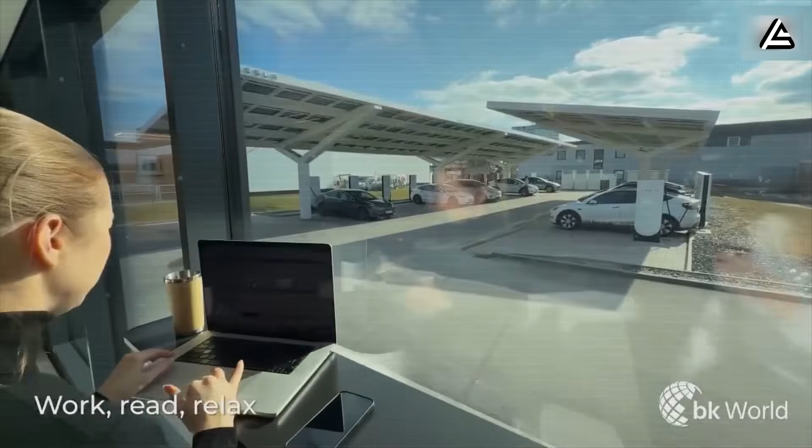For drivers, this changes the daily math. Imagine a Model 2 with a 250-mile rating. Even if that figure is 20 miles less than a Model 3 standard range, the fact that you can add 250 miles of charge during a coffee stop instead of waiting half an hour at a charger flips the equation. In effect, the aluminum-ion battery asks, do you really need 300 miles in one shot? Or would you rather have unlimited miles available 10 minutes at a time?

Here's the real question. If you could eliminate charging anxiety completely, would you trade 30 miles of range for it?

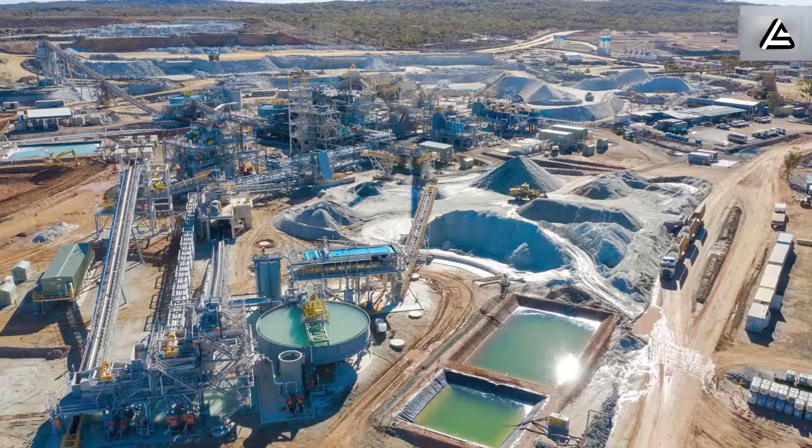To understand why this matters, we need to examine the supply chain vulnerabilities that have plagued lithium-ion. Lithium extraction is concentrated in a handful of countries, including Australia, Chile, China, and Argentina, controlling roughly 90% of global production. This concentration creates geopolitical risk and price volatility. Between 2020 and 2022, lithium carbonate prices surged from around $6,000 per ton to over $70,000 per ton, nearly a 12 times increase before moderating.

These wild swings make long-term EV pricing nearly impossible to predict. Aluminum presents a stark contrast. Global aluminum production capacity exceeds 65 million tons annually, distributed across dozens of countries. The material is so abundant that aluminum is actively recycled at scale. Nearly 75% of all aluminum ever produced is still in use today.

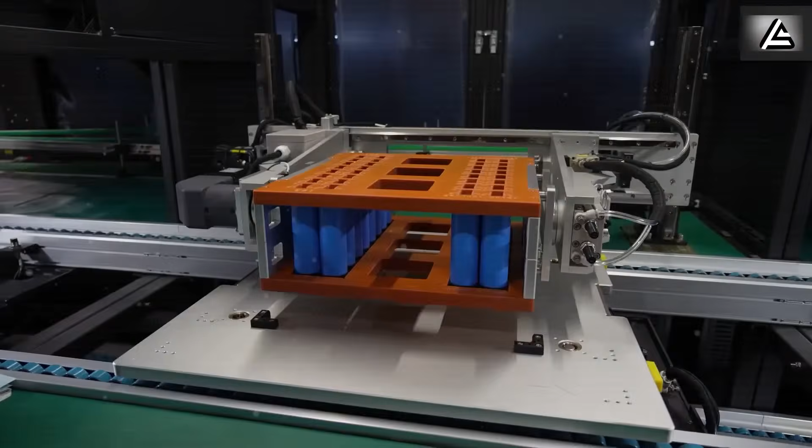This established recycling infrastructure means end-of-life aluminum-ion batteries could feed directly back into new battery production, creating a truly circular supply chain. Scale that to a compact EV like the Tesla Model 2, expected to carry a 50 kilowatt-hour battery pack. Using today's lithium cells, that pack would cost around $6,500 before assembly. Replace it with aluminum-ion, and the figure drops to between $3,200 and $3,500. That is a savings of more than $3,000 per vehicle, almost entirely from the battery alone.

For Tesla, the implications are clear. Battery costs have long represented up to a third of an EV's sticker price. Cutting that figure in half makes it possible for Musk to keep the Model 2 near the much-publicized $25,000 target, and in some markets possibly even lower.

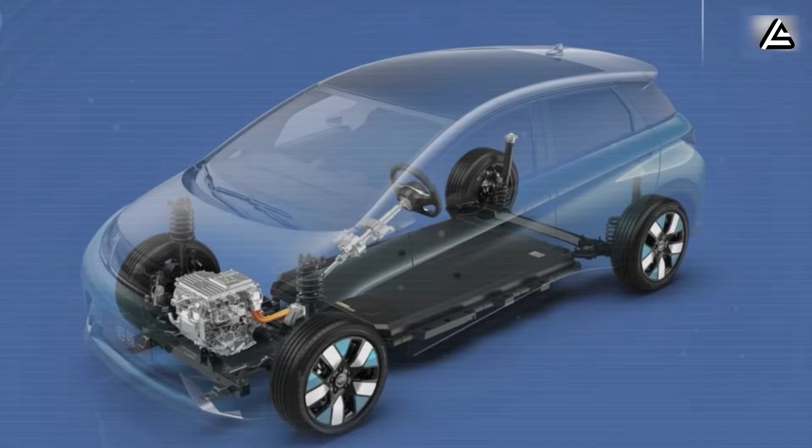When stacked against rivals like BYD, whose Dolphin EV sells for the equivalent of about $25,000 with conventional lithium packs, aluminum-ion could allow Tesla to compete not by shrinking margins, but by fundamentally rewriting the cost equation. For consumers, this doesn't just mean a cheaper car, it signals the arrival of a Tesla that finally hits mass-market affordability without compromising profit. Tesla Model 2 is about to launch in 2026.

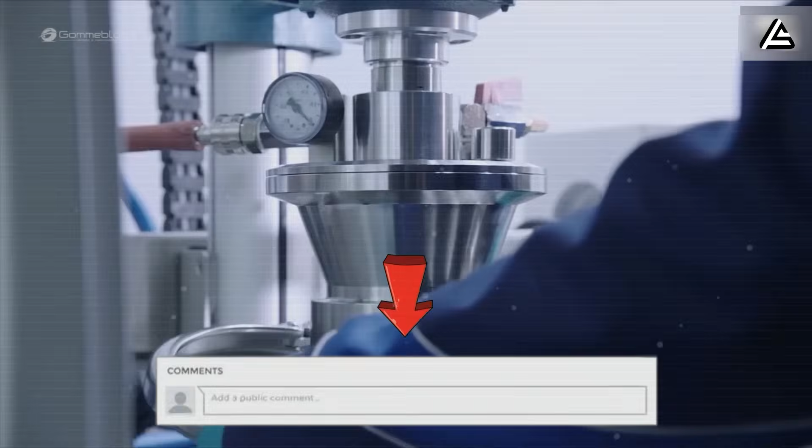That gives us about 12 to 18 months to see whether aluminum-ion lives up to these projections or becomes another promising technology that failed to scale. The difference between those two outcomes will likely determine whether Tesla dominates the next decade of automotive history or becomes a cautionary tale about betting everything on unproven technology.

Imagine flipping a switch and your world changes in seconds. Finally here, Tesla is about to introduce a new battery architecture, the first time ever that they are testing an aluminum-ion battery, and have achieved very impressive initial impressions. Elon Musk teased it perfectly: what we call the structural battery, where the battery for the first time will have dual use. There are a few more elements that we won't get to today, but we will get to in the future.

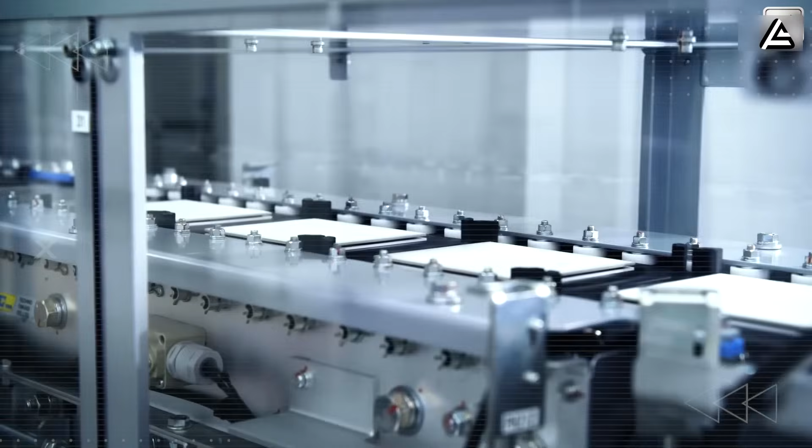How does Tesla redefine energy entirely by developing a new battery architecture? What if Tesla built a battery that works like a prism, bending energy to unlock impossible power? Let's meet Prism Core, the idea at the heart of 2026's revolution. Picture a 3D polyhedral architecture inspired by crystal lattice dynamics, where interlocking aluminum-ion cells shaped like dodecahedrons maximize surface area for rapid ion flow.

A nano-engineered chroma-layer aluminum alloy wraps each cell, boosting conductivity by an estimated 700%, while integrated micro-actuators just 1 micron wide gently vibrate to keep ions from clumping. Think of Prism Core like a diamond: its geometry traps and amplifies energy. This isn't just engineering, it's Tesla rewriting the laws of energy.

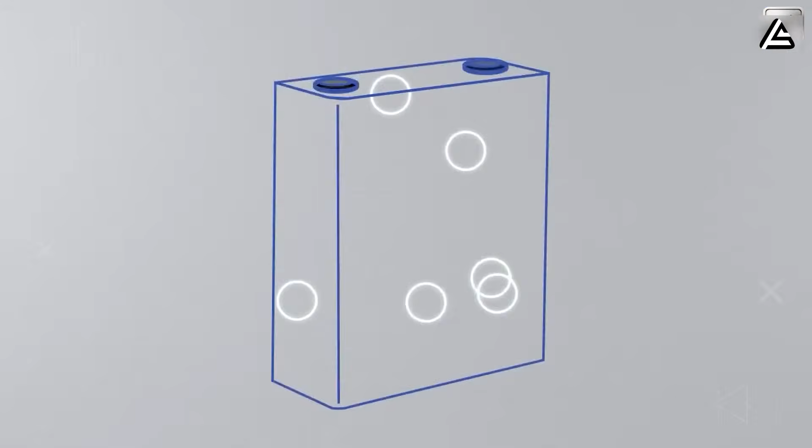Here's how it works. Aluminum carries a trivalent charge, 3 electrons per ion, so when those ions move through precisely channeled pathways inside a polyhedral frame, resistive losses plummet. If the geometry is right, you can direct ions like highway traffic at rush hour, and that is exactly what the chroma layer does. It behaves like a real-time traffic controller that adapts to voltage spikes and keeps electrons flowing smoothly. In theory, that cuts energy loss by up to 95%, which is why this architecture matters for families, not just labs. Less waste equals more usable power in every drive, every school run, every emergency.

Why does this redefine family-friendly for Tesla Model 2? Because efficiency compounds into everything you feel day to day. A pack that targets 2,000 watt-hours per kilogram changes the math of cost, space, and safety all at once.

If a 40 kilowatt-hour Prism Core pack truly stores power at that density, you're talking about an effective 1,200 mile range claim per charge, with a system mass near 80 pounds, lighter than many laptops plus textbooks in a high school backpack, yet structurally stronger than a traditional pack because the cells interlock like a geodesic frame. Lighter mass means quicker acceleration, shorter braking distances around crosswalks, and easier suspension tuning for a calm ride that keeps kids asleep on the back seat. The same geometry that stiffens the pack also resists deformation, adding another passive safety layer without eating cabin space.

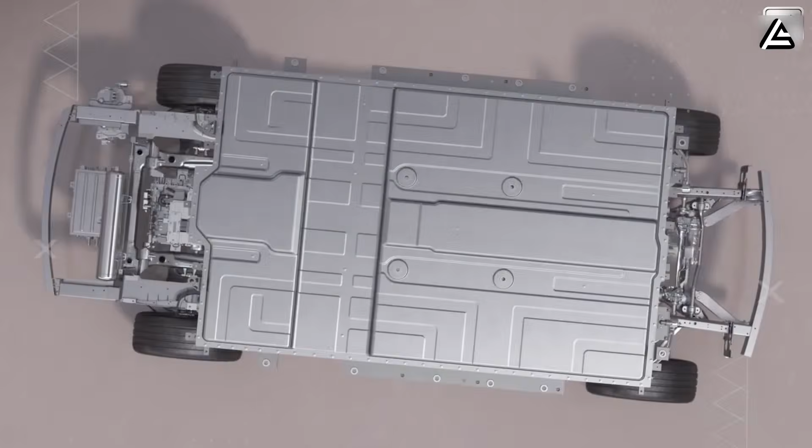Durability and confidence come next. Aluminum's stable plating behavior, guided through those polyhedral channels, is built to starve dendrites of the chaos they need to grow. Couple that with micro actuator vibration, and you get uniform ion distribution even under fast charging. In practice, that means a battery that stays predictable across winter cold and summer heat waves, so weekend plans don't depend on the weather. And because the structure is its own skeleton, service downtime shrinks—fewer modules, fewer points of failure, faster diagnostics, the exact kind of 'it just works' reliability families actually value.

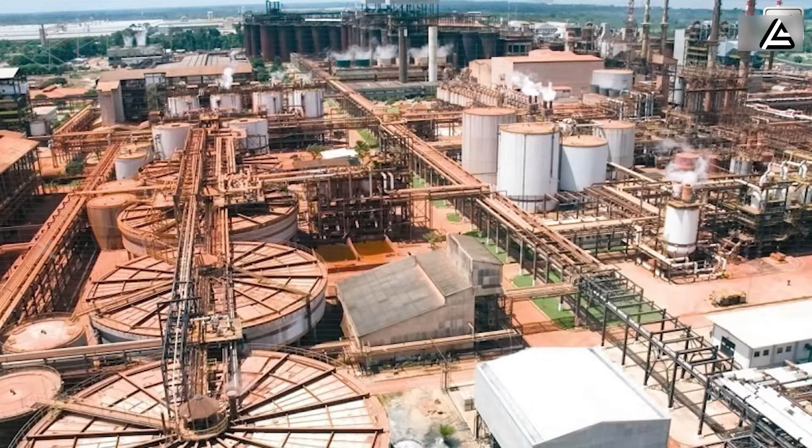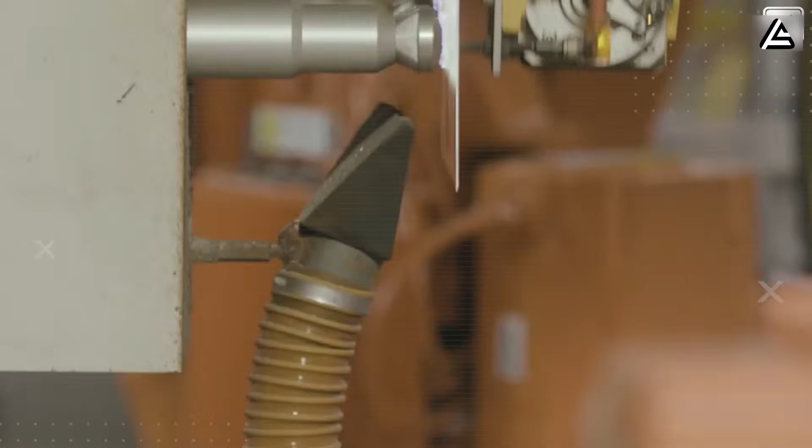Now let's be direct about credibility. These are aggressive next-gen targets derived from known material science trends: polyhedral packing to increase surface area, trivalent ion advantages, active coatings to tune conductivity, and vibration to reduce agglomeration. The leap is not magic. It is geometry plus chemistry doing exactly what we ask of them, at scale.

If Tesla brings Prism Core-like architecture to Model 2, the payoff is practical: longer trips without planning gymnastics, fewer charging stops on busy school days, safer thermal behavior in traffic, and a compact pack that frees up cabin volume for strollers, groceries, and actual legroom. That is what family-friendly should mean in the real world—a 1,200-mile range in a pack you could carry.

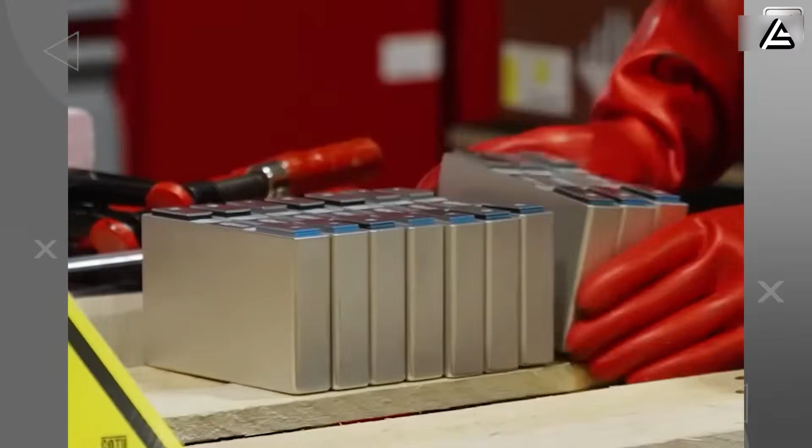First, Tesla has achieved Nova Core density, which targets 2,000 watt-hour per kilogram. This means a 40 kilowatt-hour pack near 80 pounds could credibly support a 1,200-mile range claim in a Super Aero Tesla Model 2 scenario. The Starweave Matrix idea, nano-woven aluminum fibers that behave like a high surface area sponge, explains where the extra storage would live. It's the same reason a charcoal filter captures more particles than a smooth block—more surface equals more reactions per second. If the weave reduces internal resistance while multiplying active sites, the math that beats a 60 kilowatt-hour, 300-pound lithium-ion pack at roughly 300 miles stops sounding like hype and starts sounding like engineering.

Next, flash pulse charge is where skepticism should be loudest, so let's stress test it. A 5-minute full charge implies roughly 1,200 kilowatt peak power for a 40 kilowatt-hour pack—that's substation territory. The only way this fits today's world is with station-side energy buffers, exactly what a 10 megawatt-hour megapack can do: soak up energy off-peak, then dump it in short bursts without frying the local 1 to 2 megawatt feeder. A teraflow electrolyte that raises ion mobility by several-fold is the battery side requirement.

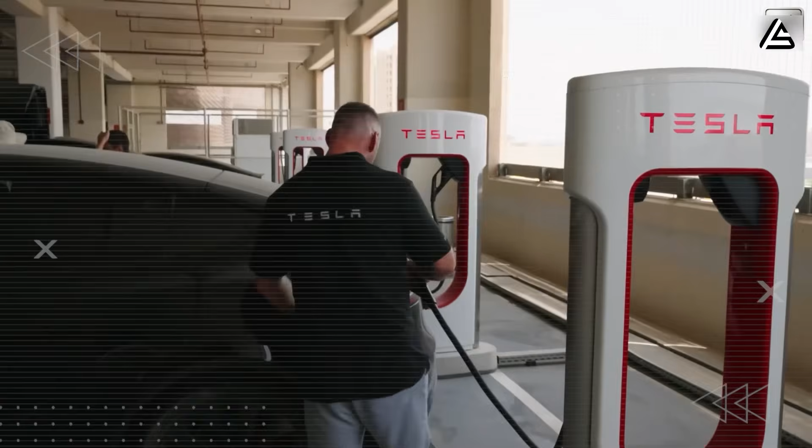A minus 94 degrees Fahrenheit to plus 338 degrees Fahrenheit operating band is aggressive. But the logic is clean. Less waste heat plus uniform current paths equals fewer thermal events to manage, which also means fewer parts and about 40 pounds saved in thermal hardware.

Regarding the fourth spec, intelligence is the silent range extender. A MindLink processor that watches grip pressure, eye flicker, and heart rate can infer whether you are calm or hurried, then pre-bias the inverter and thermal targets. If that trims throttle spikes and coasts earlier without you noticing, a 40% real-world range boost is not magic. It is coaching you without nagging you. Your battery does not just drive, it feels your vibe.

In American everyday life, that means fewer stops on the school run loop, less hassle when you are late to a doctor's appointment, and more miles left when you surprise visit the grandparents.

Finally, cost completes the picture. A micro-cost revolution at $1,800 per pack enables a $10,000 Model 2 base, only if manufacturing hits near-perfect yields. Quantum Smith laser-guided assembly targeting 99.9999% precision is not sci-fi.

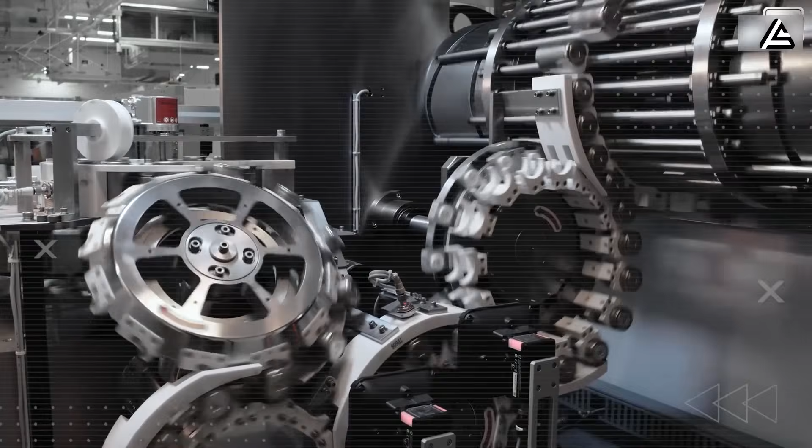It is what semiconductor fabs already chase. If scrap falls and modules drop from the bill of materials, total ownership can realistically fall by 80% over 25 years compared with legacy gasoline ownership, about $50,000 versus roughly $10,000 in energy and maintenance. Pair that with abundant aluminum supply and efficient recycling, and the price story has legs, not just headlines.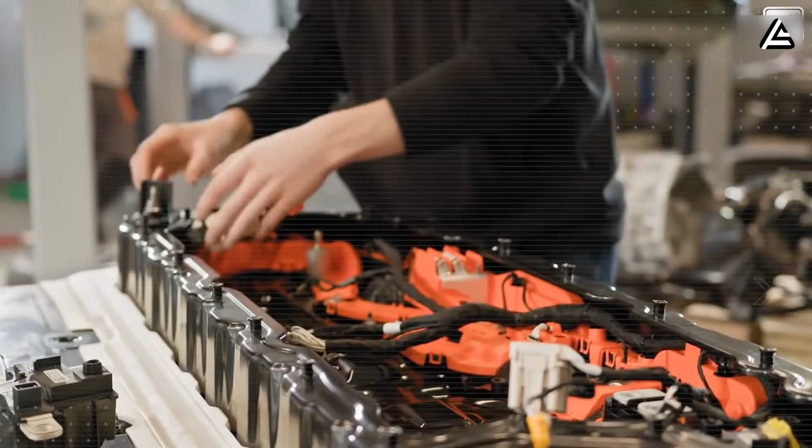Now the sanity check. None of these targets violates physics on its face. They demand tight geometry, fast ions, smart buffering, and ruthless manufacturing discipline. When you see 2,000 watt-hour per kilogram, 1,200 kilowatt charging, 30,000 cycles, and a sub-$2,000 pack in one place, the right response is not blind belief.

It is, show me the pathway. We just did. Materials with massive surface area, electrolytes tuned for speed, grid buffers that burst, algorithms that anticipate you, and factories that hit yields the way chips do.

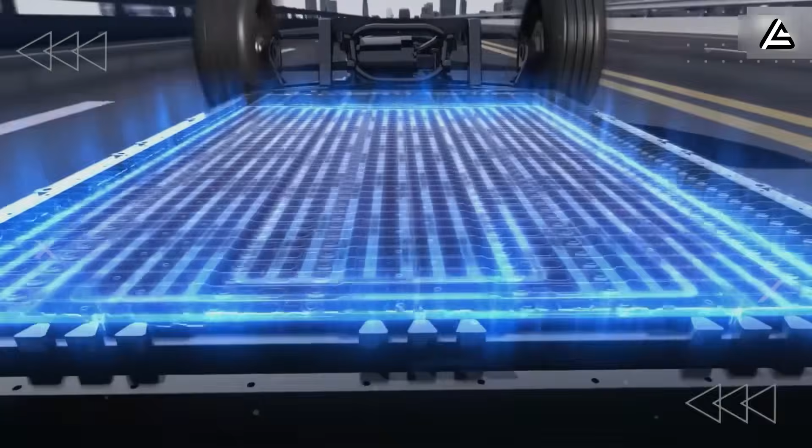New leaks point to a battery crossroads for Tesla's $25,000 Model 2. Two very different blueprints are in play: aluminum-ion and sodium-ion. Both sit among the most advanced technologies in modern battery manufacturing, and each could shape how this car charges, drives, and ages over time, all of which could affect your choice of daily drive, from short city hops to long highway runs.

We look at real charging windows instead of lab sound bites. We map pack size to dollars per kilowatt hour, so you can see how Tesla could hold the line at the showroom price. We check how each chemistry handles heat, cold, and repeated fast charges. We also cover end of life, second life for energy storage, and what those pieces mean for your long-term costs. By the end, you will know which path matches your driving and Tesla's 2026 build plan.

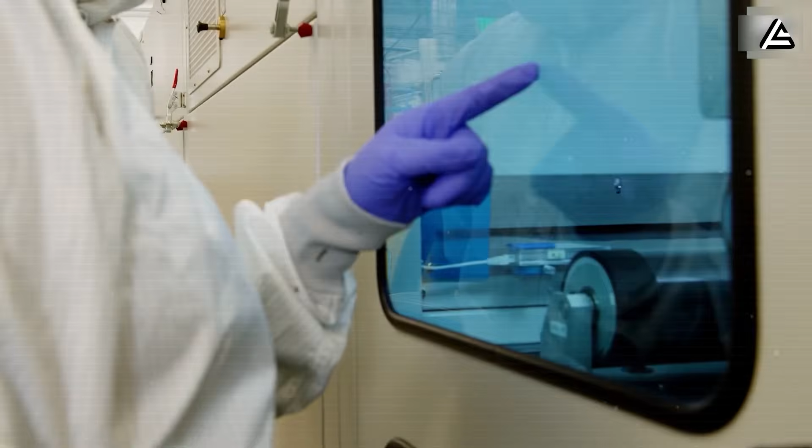What makes aluminum-ion and sodium-ion batteries contenders for the 2026 Tesla Model 2? Tesla is reportedly testing two radically different battery technologies for its upcoming $25,000 Model 2, and early leaked data gives us a glimpse into their potential performance.

The aluminum-ion battery, a next-gen development by Tesla engineers, promises ultra-fast charging that could replenish 80% of its capacity in as little as 10 minutes, far outpacing the fastest lithium-ion packs currently on the market, which typically require 30 to 40 minutes. Laboratory estimates suggest a single Al-ion pack could deliver up to 1,000 miles of range per charge, translating to roughly 1.5 times the distance of today's standard Tesla Model 3 long-range battery.

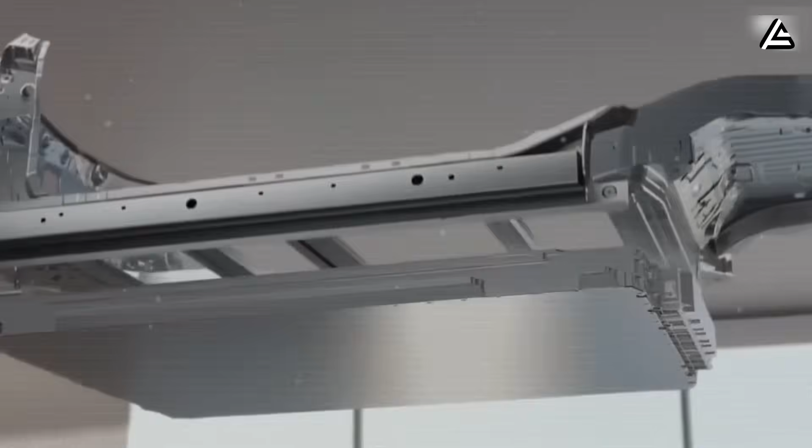Its projected lifespan is astonishing, with internal leaks pointing to 27 years of usable life, or over 10,000 full charge cycles, a level of durability no mass-market EV has yet achieved.

Safety is another critical advantage. Crash test simulations indicate that punctured Al-ion cells rarely exceed 120 degrees Celsius and do not enter thermal runaway, drastically reducing fire risk compared to conventional lithium packs, which can reach 500 to 600 degrees Celsius in similar scenarios.

The trade-offs are clear. Aluminum-ion has lower volumetric energy density than lithium, requiring a slightly larger pack to match comparable range, and production costs remain high due to exotic aluminum-titanium alloys and precision assembly.

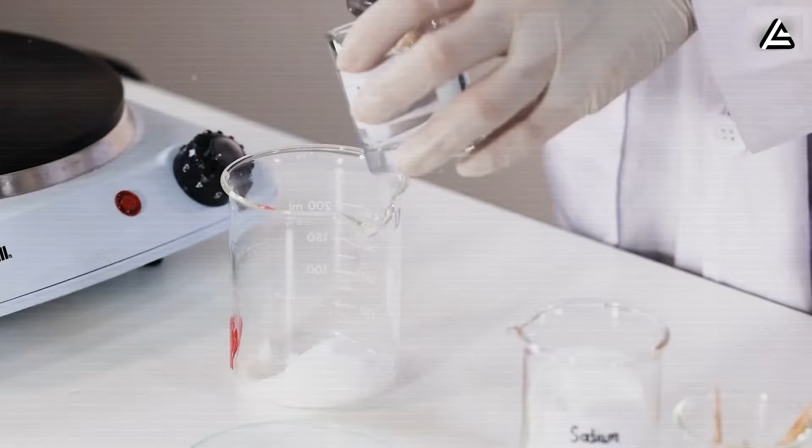Meanwhile, Tesla is also experimenting with sodium-ion batteries, positioning them as a cost-effective solution for mass-market adoption. Sodium-ion packs rely on abundant, low-cost sodium, enabling production at a fraction of the cost of lithium or aluminum-ion cells. Energy density is moderate, roughly 160 to 180 watt-hours per kilogram, compared to 250 to 270 watt-hours per kilogram for typical lithium-ion, and an estimated 220 watt-hours per kilogram for Al-ion, making them adequate for daily city driving or regional commutes, but less suited for extended trips without frequent charging.

Which battery would you pick for your Tesla Model 2?

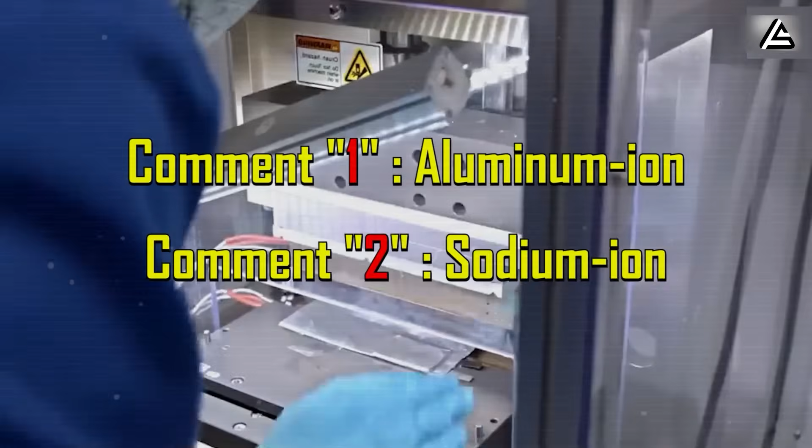How do aluminum-ion and sodium-ion compare directly for the 2026 Tesla Model 2?

Looking beyond basic specifications, aluminum-ion batteries stand out for their long-term efficiency under sustained high loads. Internal Tesla leaks suggest that after extensive highway driving at 120 kilometers per hour, over distances exceeding 400,000 kilometers, Al-ion packs retain over 85% of their initial discharge efficiency, demonstrating remarkable consistency even in extreme conditions.

Sodium-ion packs, by contrast, begin to show gradual capacity fade under continuous high-temperature operation, particularly during summer or extended high-speed use, although performance remains adequate for typical daily commuting.

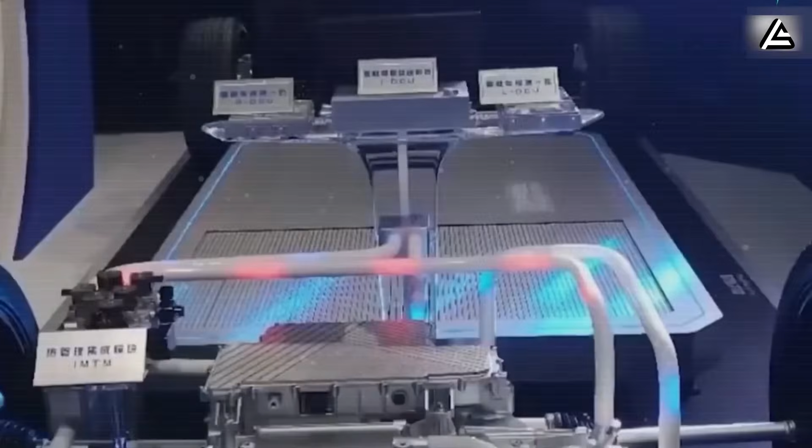In terms of real-world application, aluminum-ion is engineered for drivers who rely on their Model 2 for frequent intercity trips or multi-day journeys, where ultra-fast charging and consistent long-term output can significantly reduce travel downtime. Sodium-ion, with its simpler thermal management needs and lower cost, is more suited to urban driving, short routes, and frequent stop-and-go patterns, where rapid recharge is less critical.

The driving experience further highlights the differences. Vehicles equipped with aluminum-ion maintain steady power delivery at near maximum output even when energy reserves fall below 20%, ensuring predictable acceleration on highways and steep inclines. Sodium-ion vehicles may experience a slight reduction in peak performance as the battery discharges, potentially limiting acceleration by an estimated 10 to 15%, but they make up for it with affordability and accessibility, enabling more buyers to enter the EV market.

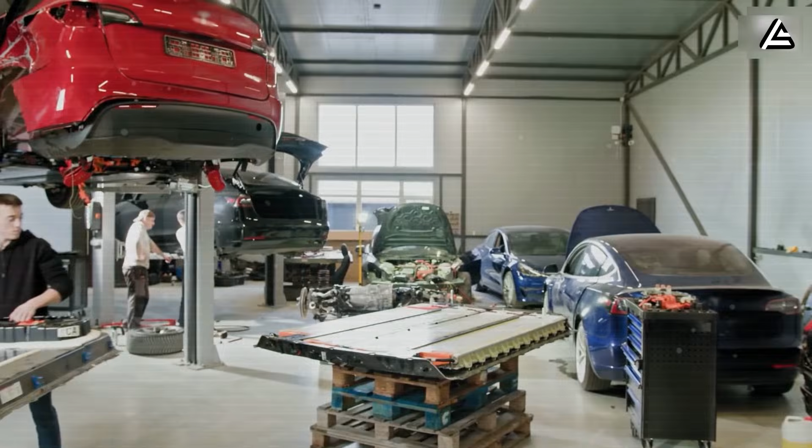From a maintenance perspective, aluminum-ion packs reduce service frequency due to their structural resilience, allowing Tesla to extend intervals between software recalibration and thermal system checks. Sodium-ion packs, while easier to replace and scale for mass production, will likely require mid-term battery replacements after roughly 3,000 to 5,000 full cycles, creating modest ongoing maintenance costs for owners.

Can either chemistry actually make Tesla Model 2 hit $25,000? Specs create excitement, but factories decide what ships. If the sticker is $25,000, the battery has to land at a price that leaves room for body, powertrain, electronics, software, logistics, and a healthy margin.

A simple way to frame it is to set a pack cost window that keeps total cost of goods in check. For a compact Tesla at this price point, the pack usually needs to sit roughly in the $2,500 to $3,500 range to keep the business case intact.

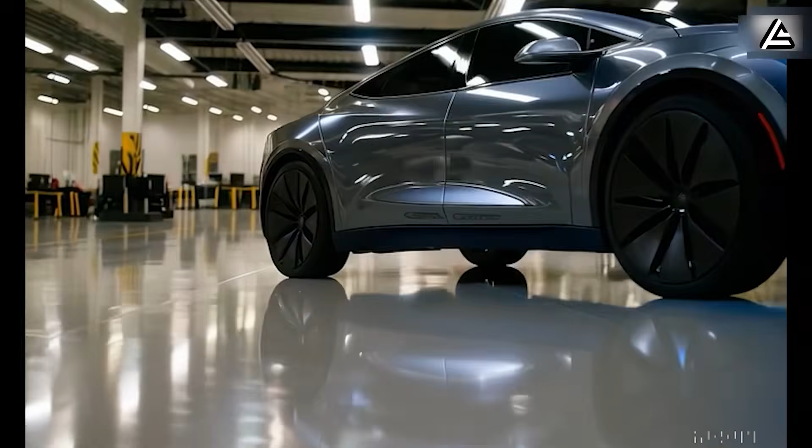With that context in place, drill down to pack size and dollars per kilowatt hour. If Model 2 targets a 42 to 48 kilowatt hour pack, you can map the math directly. At $60 per kilowatt hour, a 42 kilowatt hour pack is about $2,520, and a 48 kilowatt hour pack is about $2,880. At $75 per kilowatt hour, those become roughly $3,150 and $3,600. At $100 per kilowatt hour, you jump to about $4,200 and $4,800.

The takeaway is clear: to hold the line at $25,000 without robbing content elsewhere, Tesla needs pack-level costs closer to $60 to $75 per kilowatt hour, with a pack around 45 kilowatt hours.

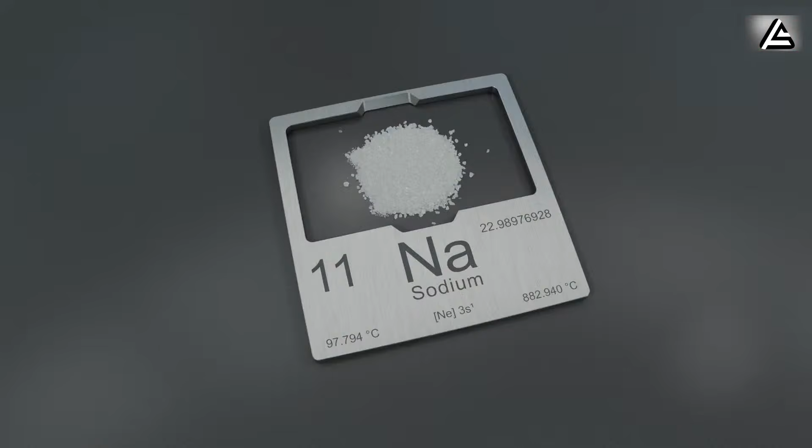That brings us to chemistry choice. Sodium-ion is the pragmatic path if the goal is volume in 2026. Sodium is abundant, cathodes avoid nickel and cobalt, and the pack architecture looks familiar with prismatic formats and conservative thermal loops. Most importantly, a scaled sodium-ion line has a realistic pathway into the $60 to $80 per kilowatt-hour band, which fits the cost window above.

Energy density in the 160 to 180 watt-hours per kilogram range is workable for a city-first compact, and charge curves can be tuned for durability while still delivering acceptable road trip stops.

On the other side, aluminum-ion is the performance headline that still has to clear the factory hurdles. New current collectors, different electrolytes, and tighter tolerances introduce fresh tooling, fresh quality gates, and a learning curve that takes time to stabilize. Early yields and scrap can keep effective pack costs elevated.

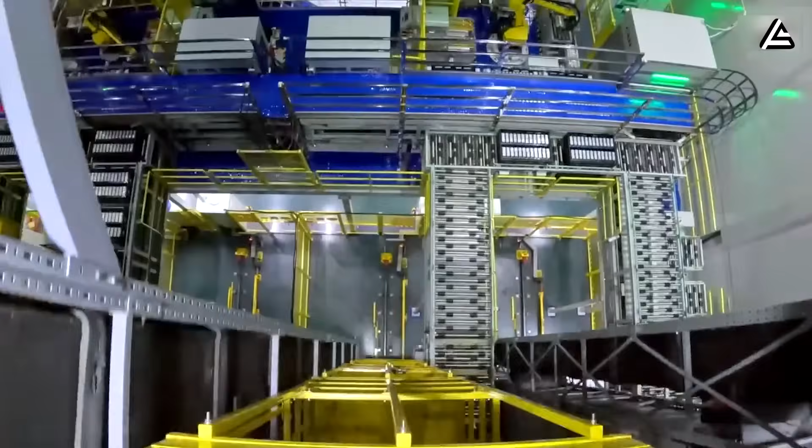If aluminum-ion enters automotive production above roughly $100 per kilowatt-hour in the first waves, a 45 kilowatt-hour pack would land near $4,500. That number can work only if Tesla finds savings elsewhere, or positions aluminum-ion as a higher trim with a price offset. Seen through that lens, the cost targets that make a $25,000 Model 2 feasible point toward sodium-ion for the first million cars.

Aluminum-ion can still play as a halo or a later refresh, once yields, warranties, and supplier learning curves bring the effective pack cost down into the same $60 to $75 per kilowatt-hour corridor. In other words, sodium-ion secures the price and schedule, while aluminum-ion preserves the upside once manufacturing confidence catches up.

After 200,000 miles, what value remains? Range and charge time shape the purchase, but end of life shapes the story you tell years later. Here, the two chemistries diverge in ways that matter to regulators, fleet buyers, and anyone who cares about total cost.

Aluminum starts with a recycling advantage. Recovered aluminum typically saves about 95% of the energy required to produce primary aluminum. That means lower embodied emissions for pack hardware that already uses a lot of aluminum in enclosures, bus bars, and current collectors. It also means stronger scrap value at end of life, which helps the economics of take-back programs.

Sodium-ion earns points on the front end. The bill of materials avoids lithium, nickel, and cobalt, which reduces exposure to volatile pricing and simplifies compliance for mineral sourcing rules. On the back end, sodium-ion recycling is newer, but the chemistry's lower intrinsic metal value can actually reduce theft risk and simplify logistics for returns.

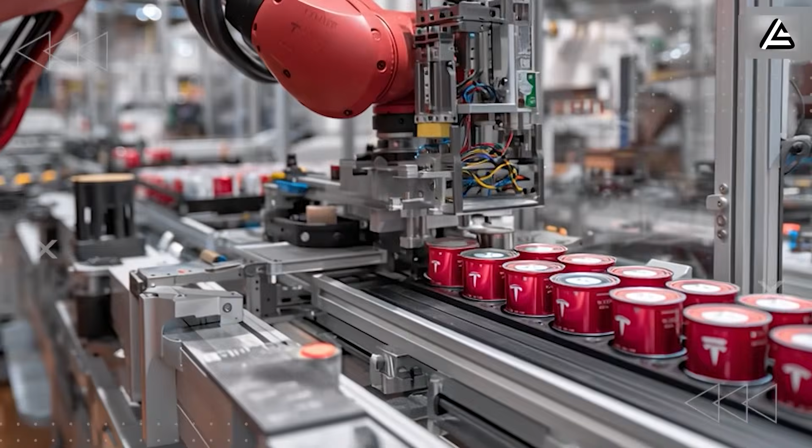That wraps up our deep dive into the Model 2 battery question. Aluminum-ion and sodium-ion both look promising, and the real story will be how Tesla balances price, performance, and scale in 2026.